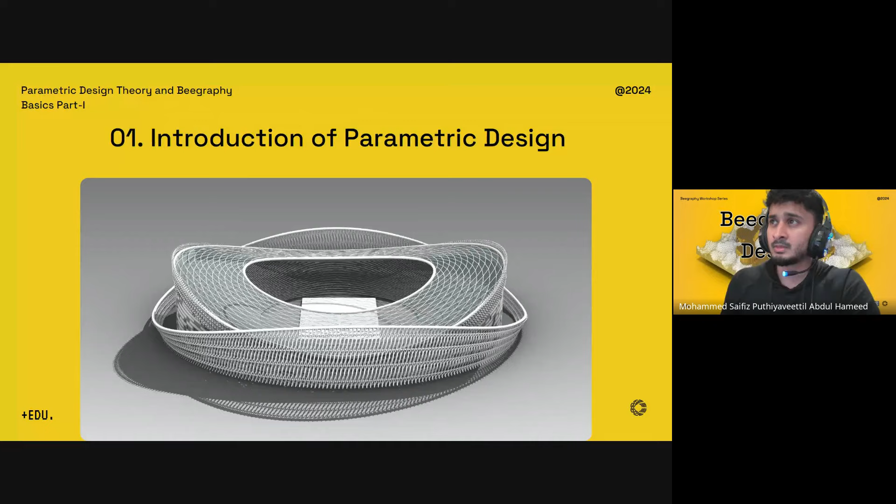So we can start with the introduction to parametric design. What is parametric design? It's not something very new. A lot of people have been developing concepts, theories, and tools on this topic. In easier terms, it's a process where you have parameters or algorithms that define shapes or forms, which then enables a flexible and adaptable design solution. So 3 key elements: parameters and algorithms that define shapes and forms, providing a process that is more flexible and adaptable as a solution.

Now, we'll compare with the traditional design process to better understand the advantages and disadvantages of parametric design. If you've worked on 3D modeling tools like SketchUp, Rhino, or any other modeling process, you'll understand that it's quite a static and linear process. It's more like sculpting. You make manual adjustments on a fixed geometry, and therefore the flexibility is quite limited.

But parametric design, as you learn more, is an iterative and dynamic process. You constantly play with the inputs and see what the output looks like. You again play with the inputs. So it's a back and forth. And once you understand some of the variables, you can convert them into constraints that you don't want to change.

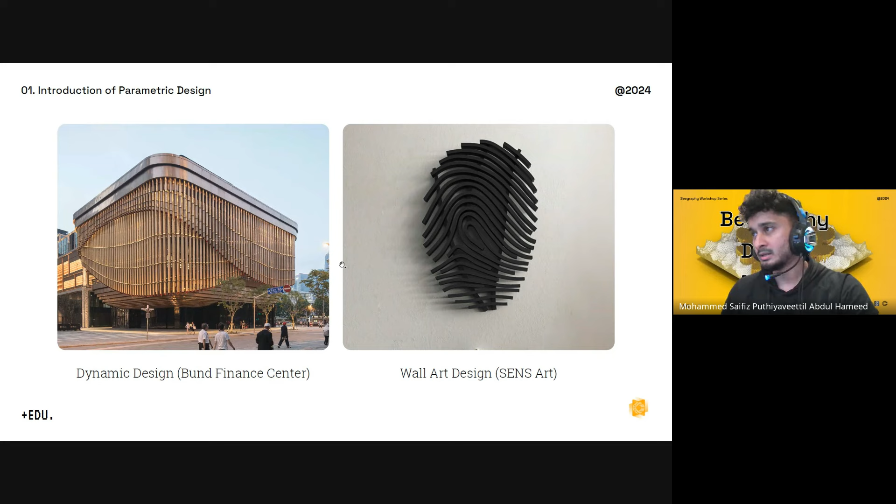We have also been trying as part of CODIN Parametric to develop some forms, some interesting forms, complex geometries that if you try to do it through a traditional method, you would find it tricky and challenging. And if you have to make 4 or 5 iterations of it, you can imagine how long that would take. We have been developing those forms with Beegraphy, and the results are very impressive.

So as you start trying, you could use this as benchmarks and try to make something way cooler than these. So this just gives an idea of how much you can push the limits, right? You can push even further.

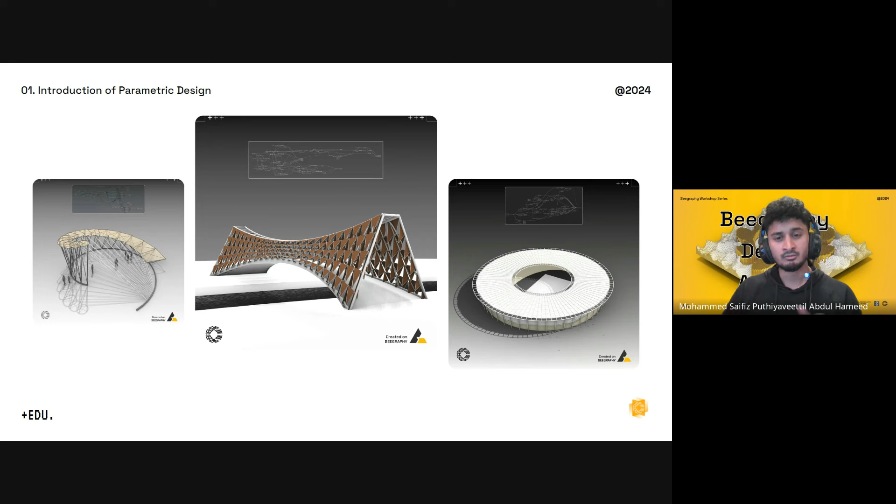Currently, the tools that are in the market that are available, I would say you have Grasshopper on the Rhino ecosystem, and then you have Dynamo for Revit, and we have Beegraphy. The difference is the other two are more local. You have to install it in your computers, but Beegraphy is more web-based, as Lernik had earlier mentioned. And you can see the shift in most of the tools and softwares, organizational tools. It's slowly heading towards cloud-based, most of the tools, because it's more about convenience.

You want to access it at your convenience wherever you are. It doesn't matter if you switch your computers, if you're on your work laptop, if you're on your home PC, wherever you are, you don't have to constantly carry files. So that brings a lot of convenience. Also devices, right? You want to work on different devices. So these have led to this shift, and therefore, me personally, I think Beegraphy could be the tool for the future when it comes to parametric designers.

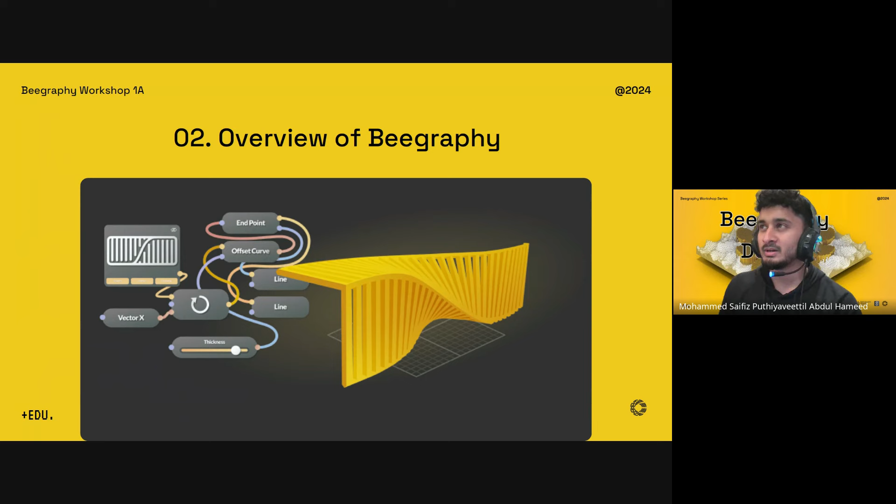So yeah, let's all hop on to this invitation from Beegraphy, and let's all join the journey and start working on it. So let's look into Beegraphy a bit more. So what is Beegraphy? Lernik mentioned earlier that it's a cloud-based platform, computational design tool for the cloud for 3D modeling. Another interesting thing is that it's developing as an ecosystem that is built to meet the evolving needs of modern computational design teams.

So as I go deeper into some of the functionalities of Beegraphy, you'll understand there are possibilities of collaborative tools, teams, the requirement of team as it develops. I think those functionalities have been integrated quite well, and these are things that make Beegraphy. I noted down some of the strengths among many, and these are: one, intuitive interface. I mentioned earlier that when it comes to parametric design tools, the steep learning curve has been due to their interface becoming less intuitive and becoming more challenging for them.

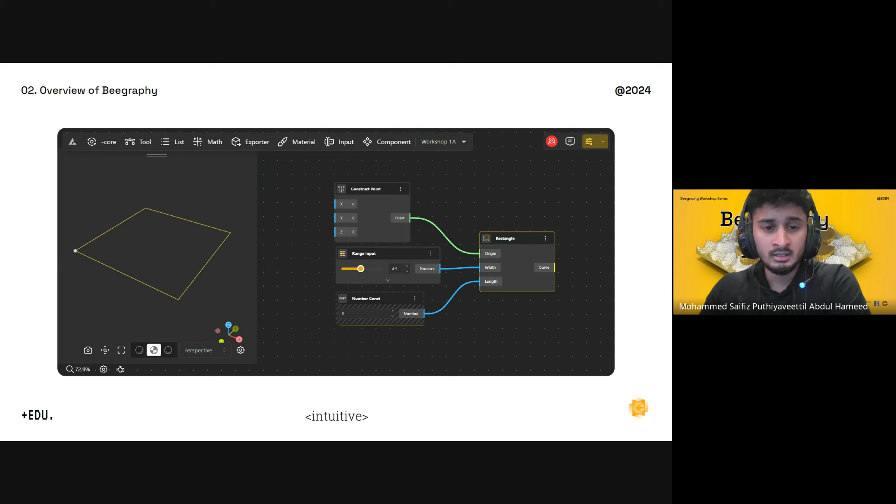So I think Beegraphy has managed to make it much more intuitive, collaborative, and compatible. So these three words are key strengths that everyone has to keep in mind among the others. But when it comes to intuitive, you have all these functionalities within one common interface. You have the 3D viewer embedded. You have icons, tools, all accessible.

When it comes to collaborative work, all these people working in the same file - people who are currently working can clearly understand how you have to share the file with different people and get comments from each, and coordinate a lot. While on Beegraphy, everyone can access the files based on different access levels, and each of them can give comments. You can also provide just the viewer mode to the client so they can check the output and the progress of the model. So it's collaboratively super strong. I don't think there's any other tool in computers today who would be doing this anytime soon.

Compatibility is also very exciting. You can use this on your phone, PC, laptop, and all devices. And I'll want to push Lernik to see if we can do a VR version in the future, where you're developing on parametric tools in VR. That'll be pretty cool, we will do that. I think early next year we'll have AR VR.

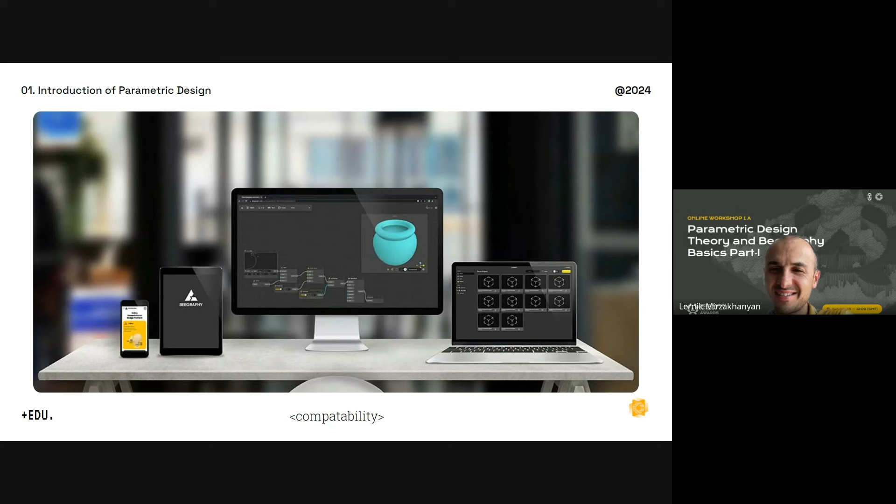That'll be crazy cool. So those are three things, but it does come with a few pressure points. But the whole Beegraphy team is there to support us. So currently it's all being done on the cloud, so with very heavy models you might start to find some challenges, but we can figure out ways to make it or keep the model lighter.

Adding plugins - we've just started slowly building that. I think that's something we'll be introducing soon, the new plugins manager, Beegraphy Plugin Manager, as we called it, BGPM. We are working on it. It will be available, I think, hopefully next month, or at least the first version. Something is already available now, but it's very limited in functionality. We will constantly work on it. I think in a few months it will already be featuring plugins for everyone.

The bugs part is something inevitable. Every time we add a feature, it may come with a bug, but we are trying to squash them very early. And I rely on the community to report everyone - each one of you, let us know. We are available on Discord, you can find me on LinkedIn, you can email us directly or anyone from the team, and let us know that something is wrong. We will be really happy to address the issue.

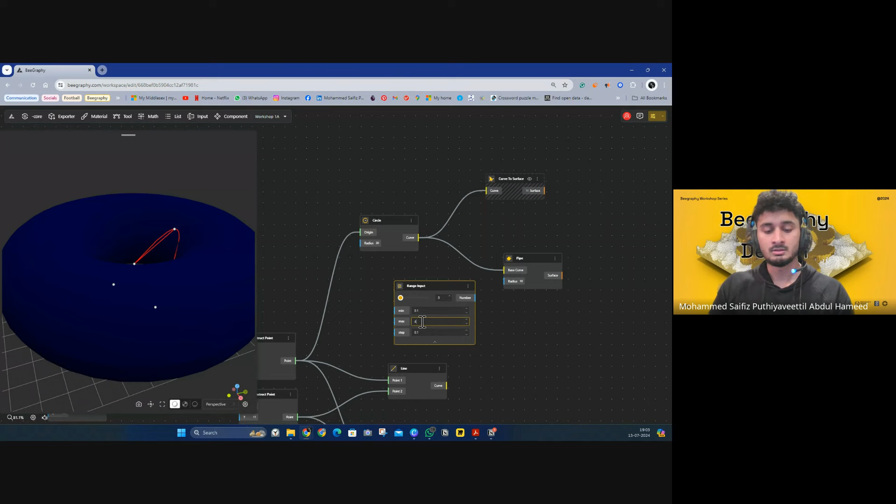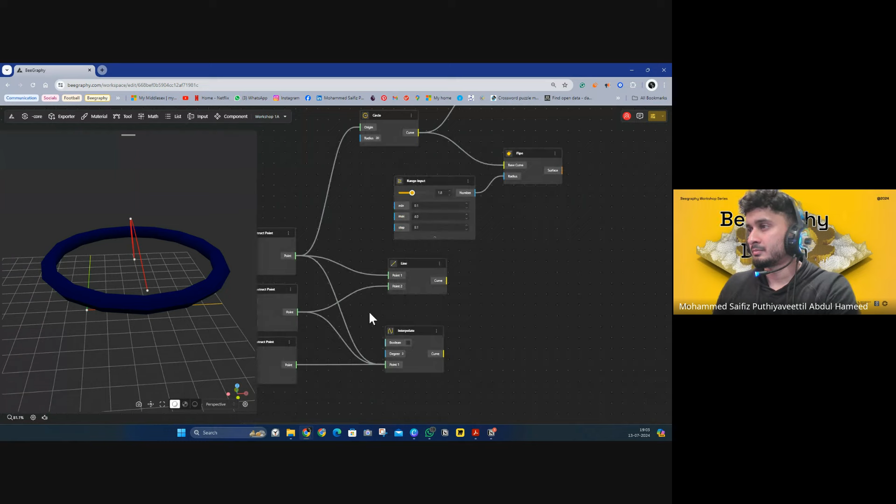Look at more functions: you could create rectangular surfaces as well. We did that initially. What you need to give is an origin point, and then you have your width and length, and that creates a surface.

I addressed it then, yes. That's how you create surfaces easily out of some curves.

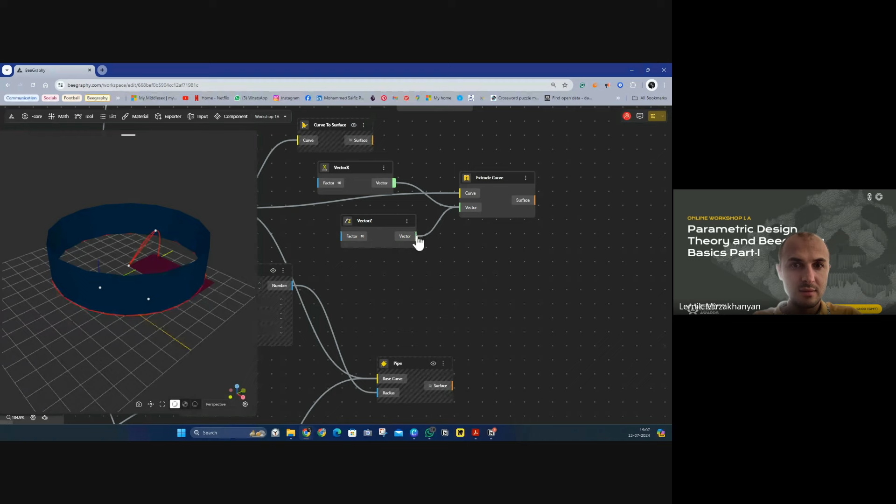Is the extrusion too small? No, maybe it's vector - in Vector X it doesn't know how to extrude it. Or something's wrong. I think it's just X and Y. Let's try reset. Obviously yes, again a bug.

Another interesting function that isn't in Grasshopper, I've noticed, is you can click on the geometry and it takes you to the component, which is quite cool. So you don't get lost in the script.

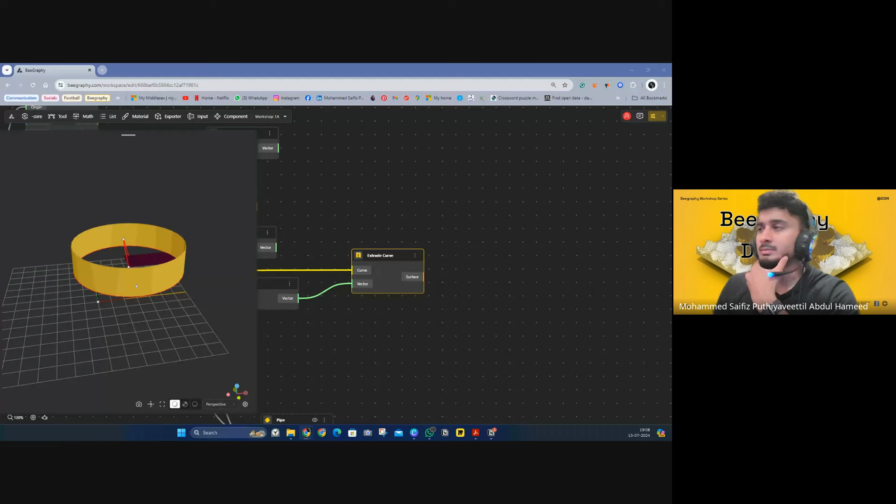So that's about extruding curves and simple surfaces. We've done simple surfaces, we could also look at solids. There are solid options where you could bring spheres, boxes inside these. About the sphere - as you can see, there's quite a lot of options for creating geometry.

We'll go into more transformations later on, as we discussed earlier. So we looked at some of these simple geometries. Now we'll try moving, scaling, mirroring - these kind of functions. So this would require a bit more complexity involved.

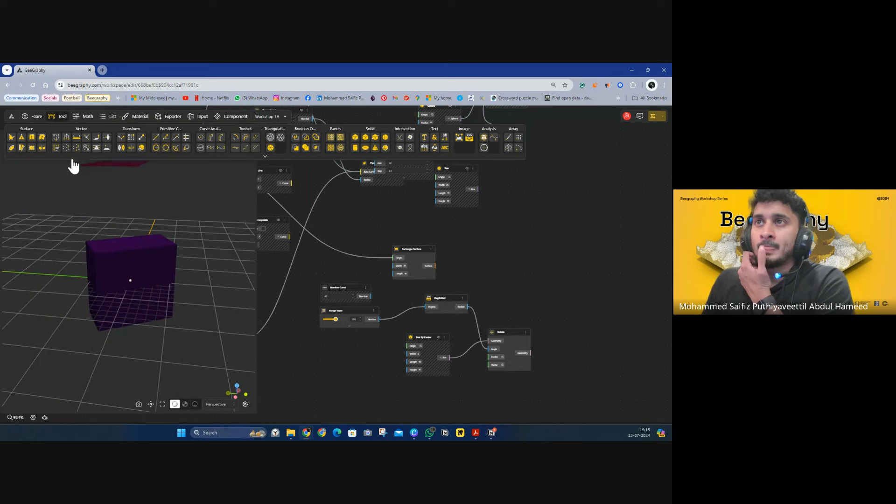360, see. Cool, so that's rotation, you have move. The other transformation tools like mirror, scaling - scaling is also quite important. We can try scaling the same box object. Yep, so that's also sorted. So scaling - these are some of the quick transformation things that you all can try out.

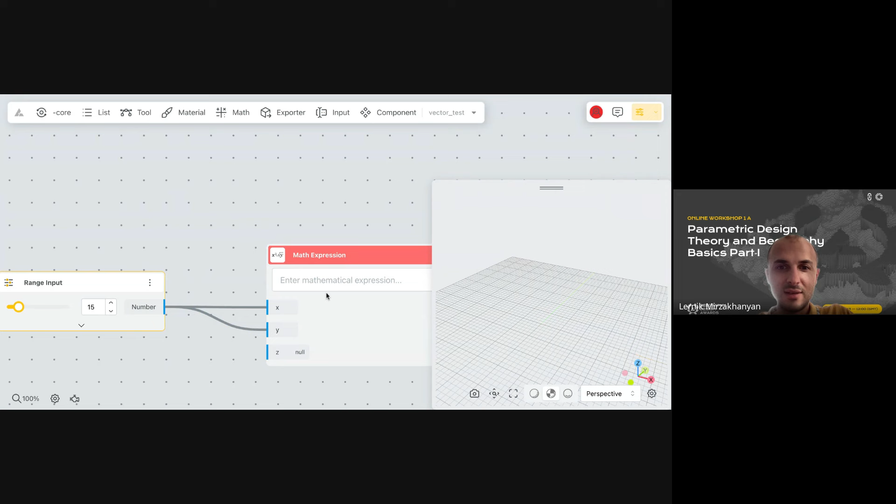Yeah. And the right versions. How do you square root? Square root. Yes, you can do the equations, but then how you apply those values is a different question. It depends on your approach.

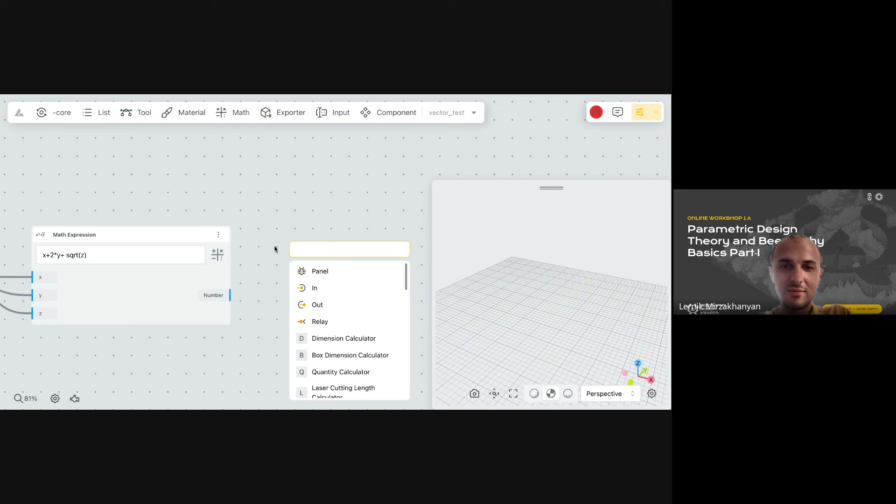So create points and use those values for those points, for example. And then construct lines, curves, and loft the curves. That's how you can probably do that in Beegraphy, rather than creating a surface and just using a math expression as an input.

Yes, in Grasshopper we can do that. What's the name of the node? It's not a node, but a mathematical expression which we have to input. So we can also do that in Beegraphy, but we will have to use multiple operators to do that. Maybe after the call you could educate me a bit, share some links. I can explain it after the call.

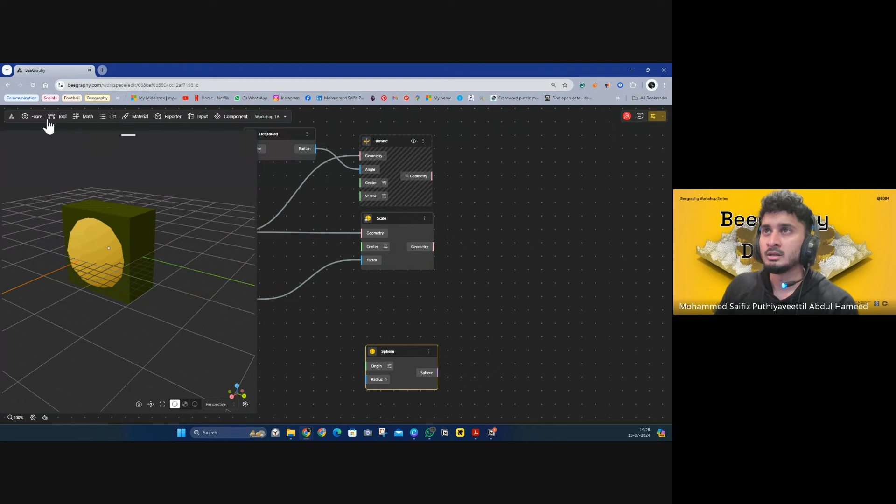Now we have the Boolean tools all under here. So you have Boolean operations. You have Boolean surface union. You have solid union. So let's bring that. Again, hold shift to bring the other. Right. And if you hide both of them, now it's working. So that's one solid union.

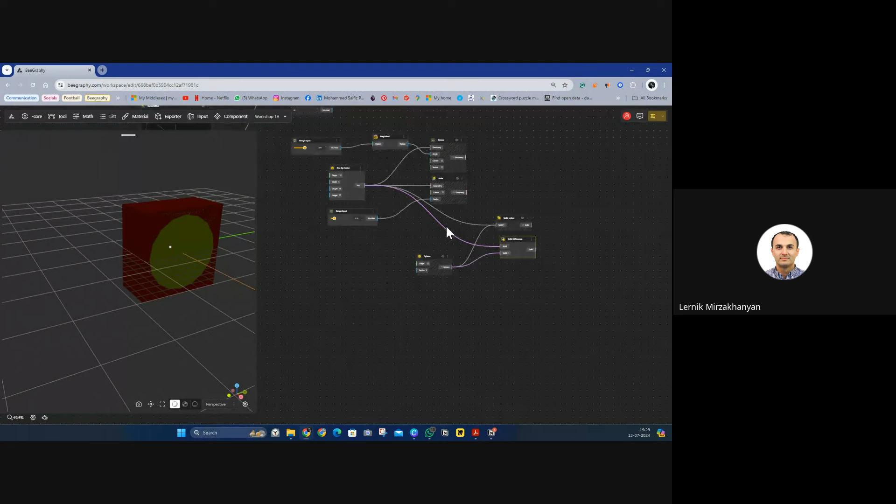And if you want to find the difference of it, you can do a Boolean difference. Same process. So you provide the initial solid that you want to keep, and then you take the other one that you want to cut from. Hide the others. You have something visible. Can you click on that sphere in the middle? Yep. Yeah. So now we have a Boolean difference. So you have these subtract functions as well that you can incorporate into your form exploration.

Next thing would be paneling. Paneling is interesting. So let's hide what we've done so far. I have all the panels here. Pick up a simple one. Surface, add the surface, divide. Same thing, add a range input to it, and you can start creating different types of panels. And then you can access the panels here and also the centers here separately. So that's mostly about how you can create these panels.

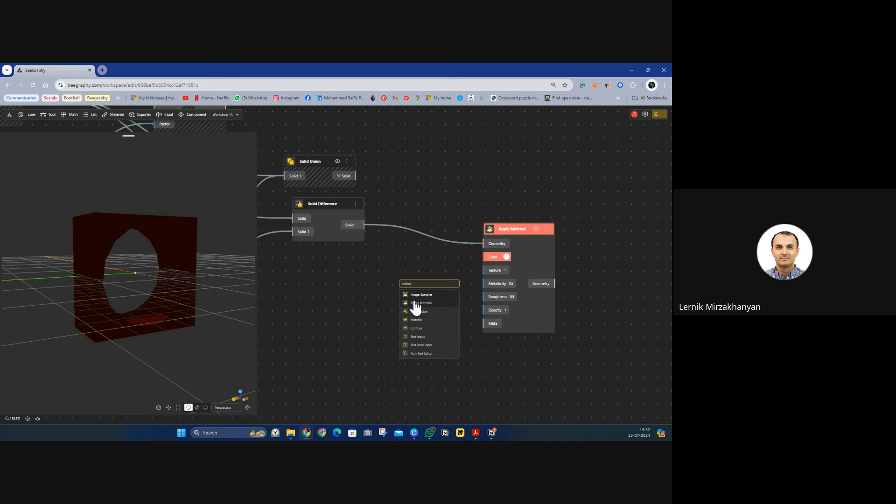Another thing that I will show quickly is adding material to this. So you have the materials tab in a texture. So this is applying material. I think it would be better to apply it on that geometry that we created earlier. Geometries. It wants a color because of the color input. It shows an error. Yeah, you can pick it from any part of the screen and then add it to the color. You can provide material. You can also adjust metallicity and roughness. I'm going to add a quick slider on this.

And to see the material more clearly, just change the render style. Yeah, and once you're kind of happy with your model or geometry, what you can add is an exporter in whichever format you prefer. Bring your exporter, connect it to the geometry. And then when you go here, you have an option to export. So if you have multiple exporters, you'll get those options here.

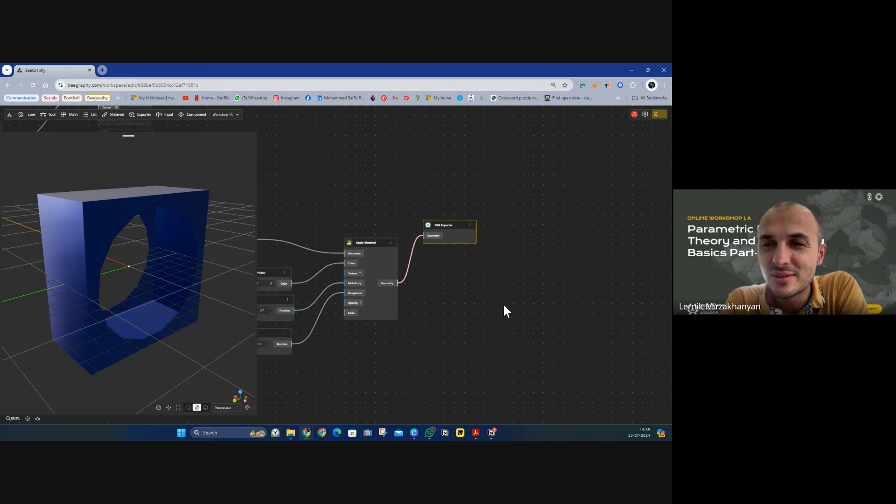Saifiz, I just thought that maybe quickly go over the configurator mode and the demo mode. Oh, yes. So if we go into the configurator mode, we can view the model with all the variables that we had added earlier. So currently what we made active are the metallicity and the color options. We'll cover this in the next module as well, and then we can come back to it and show it in more detail. So in this module, we'll just keep it a bit rough. Okay. And then we'll add this.

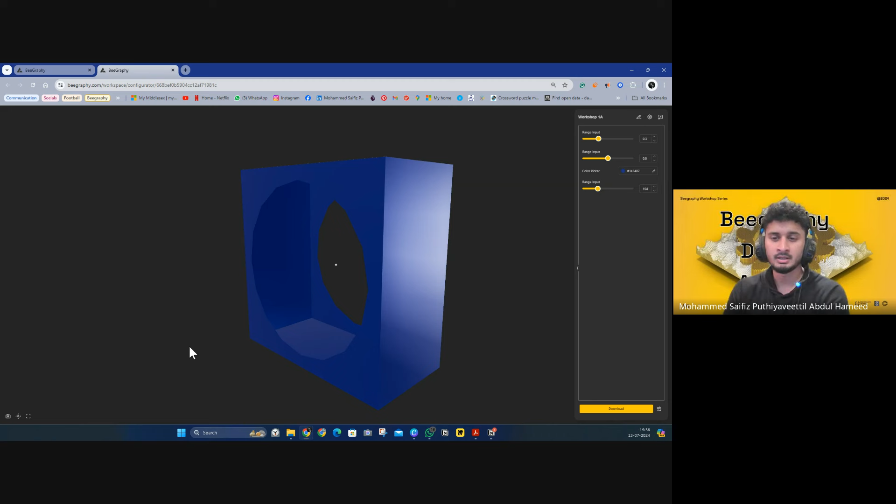Yeah. So if people have any questions about just the basics of these steps, I'm sure it's there in other tools as well. But for people who are new, getting an introduction to this is quite important. Yeah, if you guys have any questions, please drop them in the chat. We'll take another 10 minute break, and then I think we could start with the first module related to the categories.

Size of the panel in the paneling tool. Oh, let me try. I don't think it's possible similar to Grasshopper, but currently it's more on the U and V values based on the subdivision. No, I think he's talking about the debug panel, like resizing the debug panel. Let me.

No, I just tried. It's not possible.

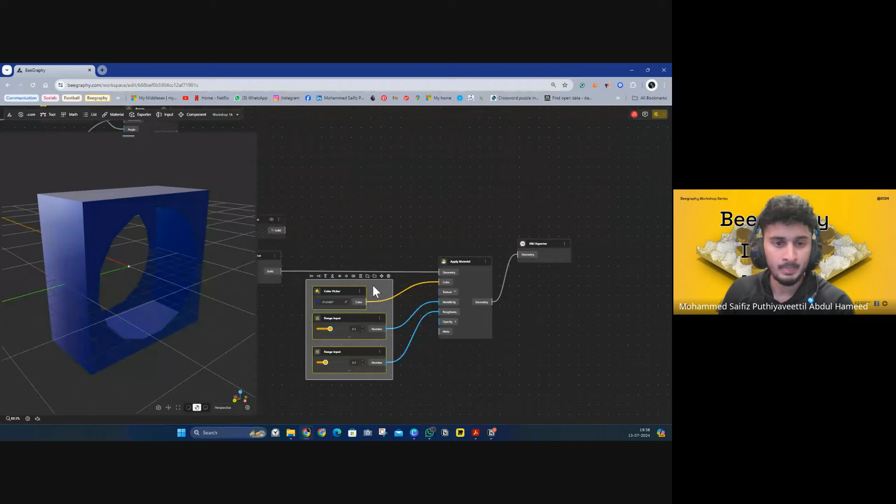Adding nodes to groups. Yeah, you can create groups and then add nodes to groups in a similar manner, like in Grasshopper. Okay, Saifiz is now gonna show that. So he selected a group, and then there's a folder type icon on top. You can create a group. You can remove, ungroup it. You can also align a group of things. These things will definitely tidy up your script.

And you also can click Control G, or Command G for those who use Mac, to create a group, and then you can also rename the nodes, the inputs, and the groups by double clicking on the name. And when something is grouped, it will be also displayed as grouped in the demo mode and configurator mode.

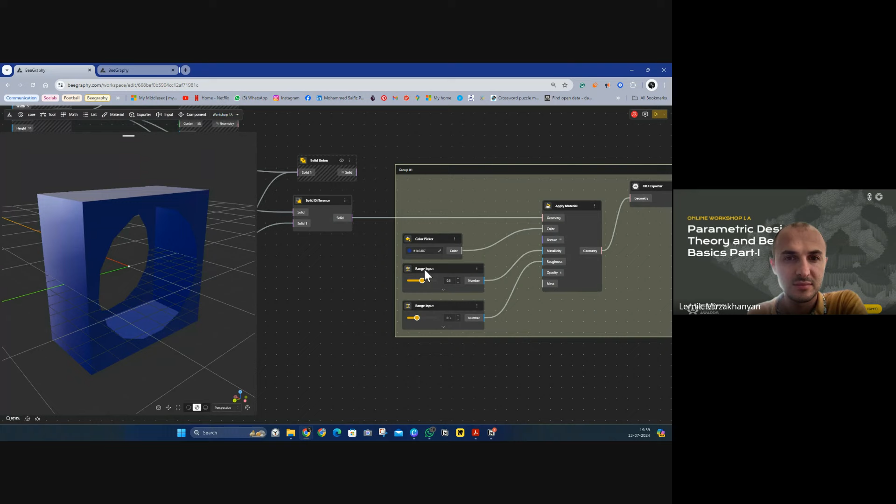So you can click on the group 01 and it will expand. And you can rename those inputs so that it's clear for everyone, like those range inputs. Yeah, these ones, no? Okay. Currently, we haven't given, so we could.

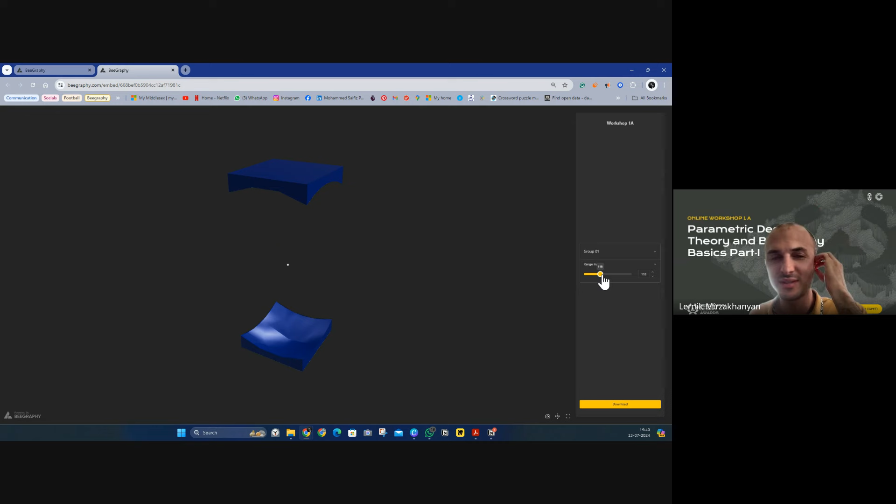Scott, I don't know how to answer the question. Like, is your question why we decided to do it in the web, or in general? If the question is about graphical programming interface, it's not us who invented it. The most popular tool for that is Grasshopper, the industry standard, which is a really great tool, very powerful. So our approach was to do the same, but in the web, so that more people have access to it, so that it's easy to integrate, so that people can collaborate in real time and stop sending each other files

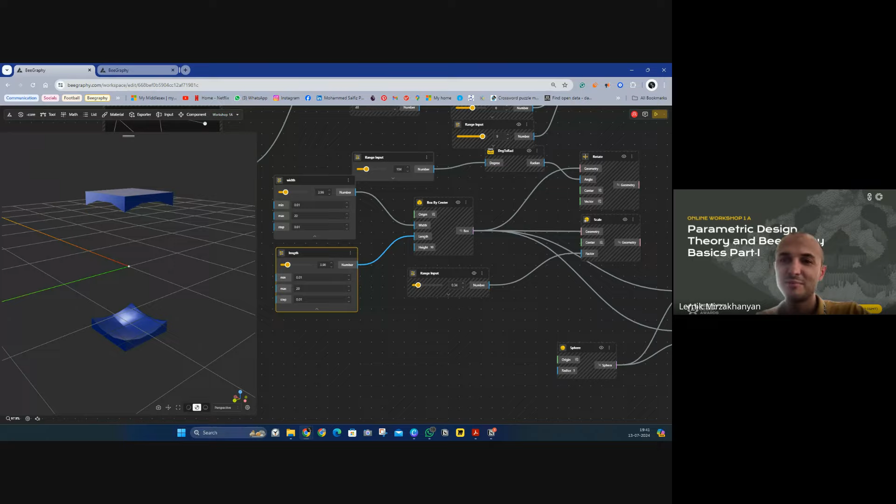or even sharing static files instead of letting their collaborators participate in the design process. For example, as Saifiz is now doing in the configurator or demo mode, a person who doesn't know visual programming or computer aided design can participate in the process and adjust the model just with the intuitive interface, like with sliders or drop downs. I see. Well, hopefully we can make a good tool that you can use with your clients.

Questions, I think we've covered most of the questions. Did I miss anything? Oh, yeah, there was a question. Any plans to add loop function where next input is based on the last output? Yes, definitely we will. It's on our task board. It's just we didn't get time to develop it further. So thanks for another reminder that it's something that you want.

Oh, just noticed that you were talking about the panel size on a surface. Yeah, Saifiz answered. All right. But let's head to the third part of the module then. Yeah, go ahead. Should I start? Yep. Let's go.

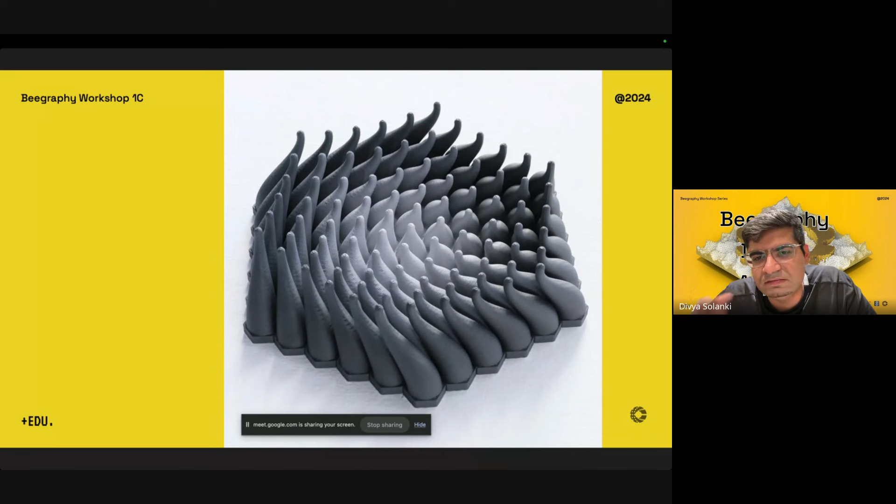So what we today will try to achieve is a form like this, and we will just try to understand how to build a logic for such a form, and then this particular logic can then be applied to any one of these forms as well as this.

So I think we can go forward to the Beegraphy page. Is my Beegraphy page visible for everyone? Yes, yes. So if everyone wants to start along, we can start at this page. I hope everyone has logged in and has this page, the editor page, on their systems.

So the first thing we can do is create a new model, and you can type in the model, and the model will come in this space here. We can also left click on this, and we can see there are multiple options, but for collaborating with other editors, we can share this, and then we can tweak some settings here to give access to multiple people, as editor or viewer or configurator, and then we can just copy link and share it with people we want to collaborate with.

So for the current workshop, I've already created a model. It's called Art and Collectibles, and we'll try to make the geometry in it. So maybe everyone can follow suit, and we are in this space now. So I'll just try to take us through the logic of the parametric building. Can everyone see the whiteboard space?

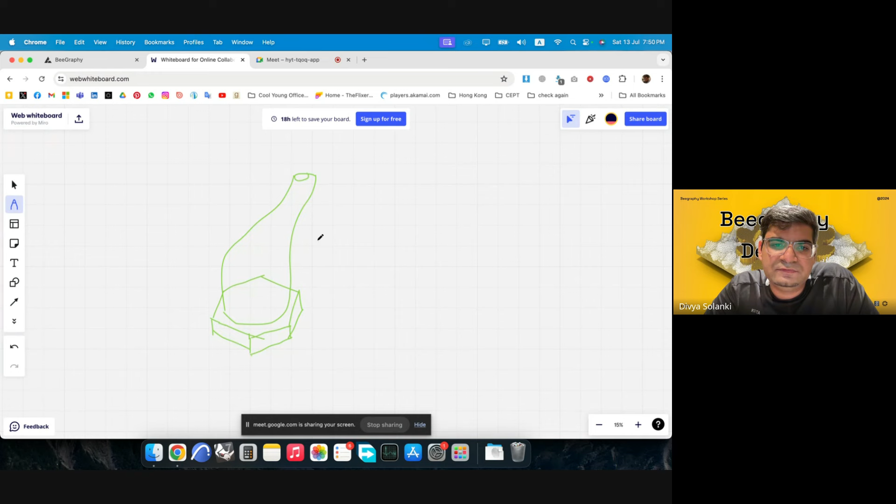And then you have a geometry which is a slightly eccentric geometry. So it rotates around, and it takes an interesting shape. And we would try to generate the shape in Beegraphy. So if we want to start, we would require a hexagonal grid first. Then we would require... okay, we'll come to that part in a bit. So let's start with the hexagonal grid first.

So if I go into the Beegraphy space, I can just write hexagon, and you'll have two options. The first is hexagonal grid. The second one is hexagonal panel. The one we'll go with is the hexagonal grid. So when I put the component here, you can see it has already zoomed in the modeling space, and we already have a grid in place. You can see there are some inputs and there are two outputs. The input it is asking is the origin, the radius of the hexagons, X and Y, and padding. Padding is basically spacing between the hexagons.

So origin by default is 0, 0, and we can see it has started the grid from the 0, 0 point on the modeling space, and our x direction is the red one here and y is that one. So it has gone in the x and y direction. The first thing we can do is give it a radius. So radius is basically the size of each of the hexagons.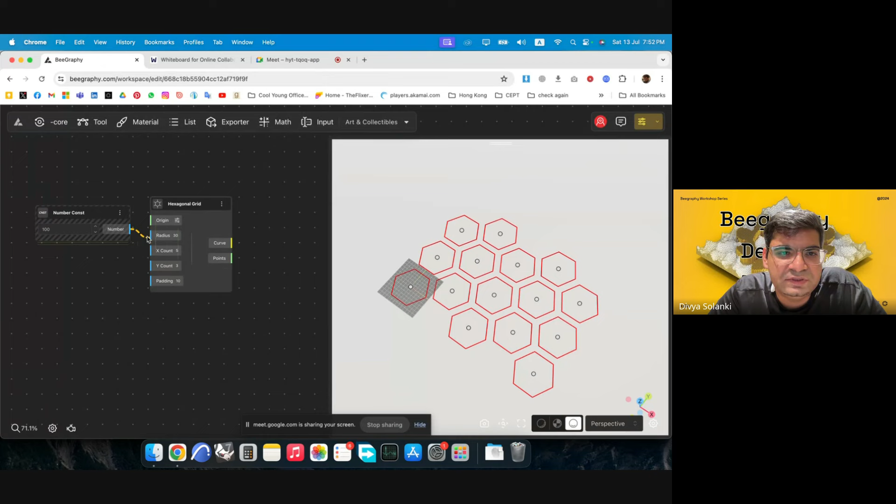So if I have to make this a constructible model, like a buildable model, then I think I'll go with a radius of 100, which would make these individual hexagons a 200 millimeter wide base. So I'll put that in radius. So you can see the grid has scaled up. Then the next thing we'll do is increase the x and y count. So I think I'll increase this to 15. I'll try to keep this constant for both for the ease of the process. And we can see we have an array of points already.

The next thing we can do is increase or decrease the spacing in between. I think it's 5. Sorry, it's 10. We can go with a 5. Yeah.

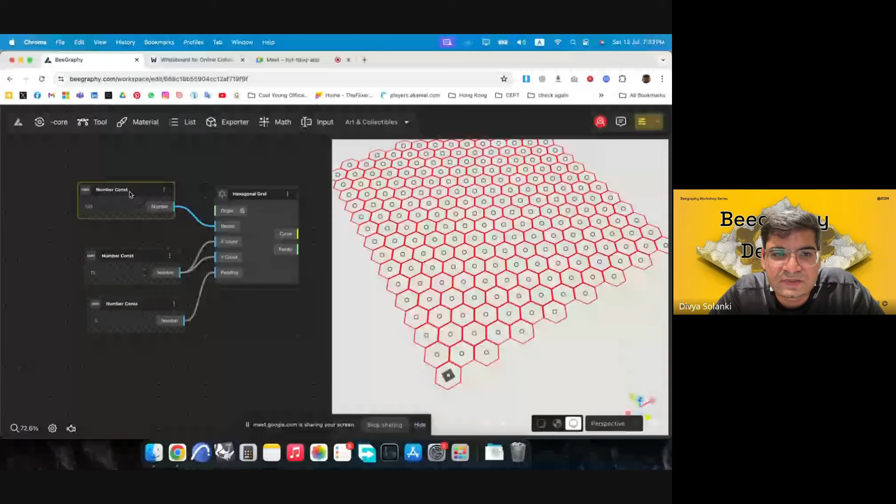Okay. Here I'll redo the constants because I want these to be variables. These are currently constants, and I want this to be available in the configurator mode. So I'll just type in 100 again, and I'll go for the range input. And I'll change its name here to hexagon size. Same thing I'll do for the other one, 15, range input.

And I'll change its name by double clicking on it to the hexagon grid size. And then I'll drag and copy it. And I'll change the last one, which was 5 here. I'll change this to 5 as well. And I'll change the name to the grid spacing. So we have 3 ranges now.

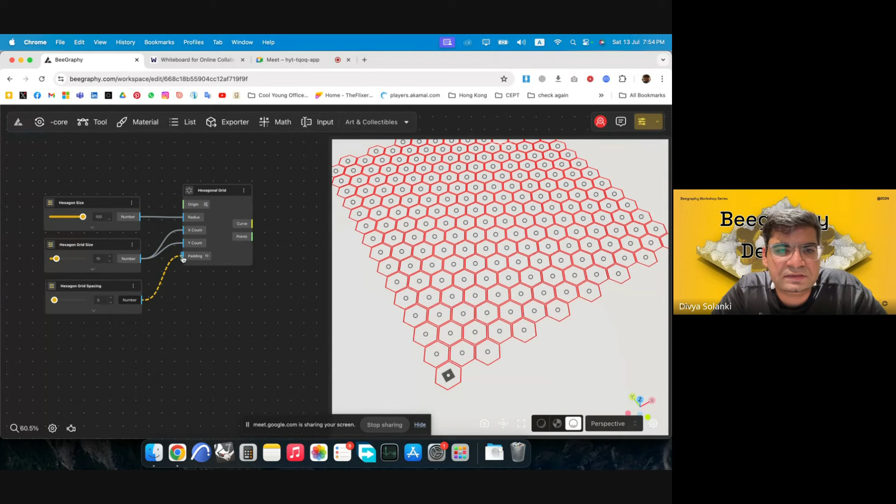And I'll replace these with the range. So this goes here, this goes in X and Y, and this goes in our spacing. Yeah. So now we have a grid. Now if I go back to that particular design, we can see it has a hexagonal shape to it, and it's not a squarish shape. But what we can try is maybe making a circular shape for the whole assembly together.

So for that, what I'll try to do is make a circle first. So I'll double click on the space, I'll write circle. And it is asking for an origin point and a radius. I can just stay with the basic, and the radius, I can make it 1 meter wide in totality. So I can go with 500, which is 500 millimeters, and I'll give that as the radius. So you can see the circle has come there.

It's a bit small. Maybe we can reduce down on the radius of the hexagons. We can make it 50. Yeah, that looks a better size. So each of the hexagons now are like 10 centimeters wide. So we have the circle. Now what we would want to do is move the circle to somewhere in between the grid. So for that, I would just move the circle. So I'll write move. I'll put the circle in geometry.

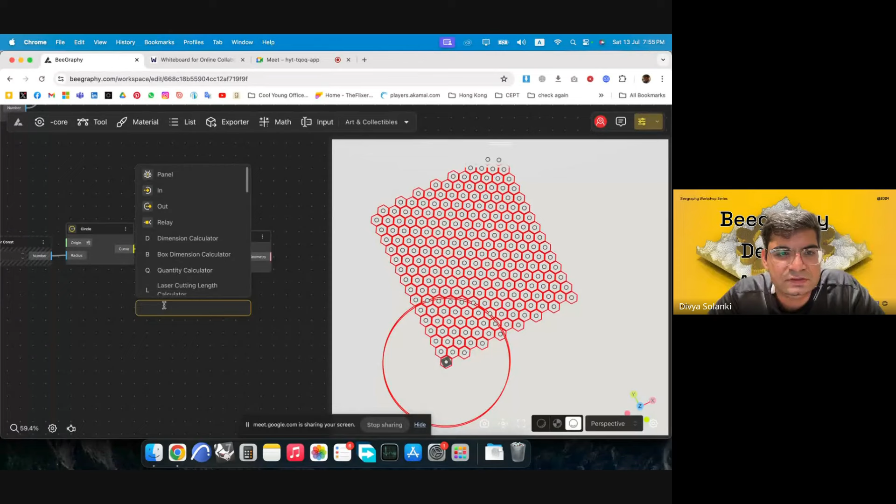I have to move the circle first in the X direction and then the Y direction. So I'll just move in first the X direction. So vector X. And then I can give the vector X some amplitude, which is the factor here. Our circle size was around 500, so we can give it, sorry, a 525, so that it's slightly beyond. So you can see the circle has been moved, but the previous circle is also visible. So we can just turn off the preview of that particular circle.

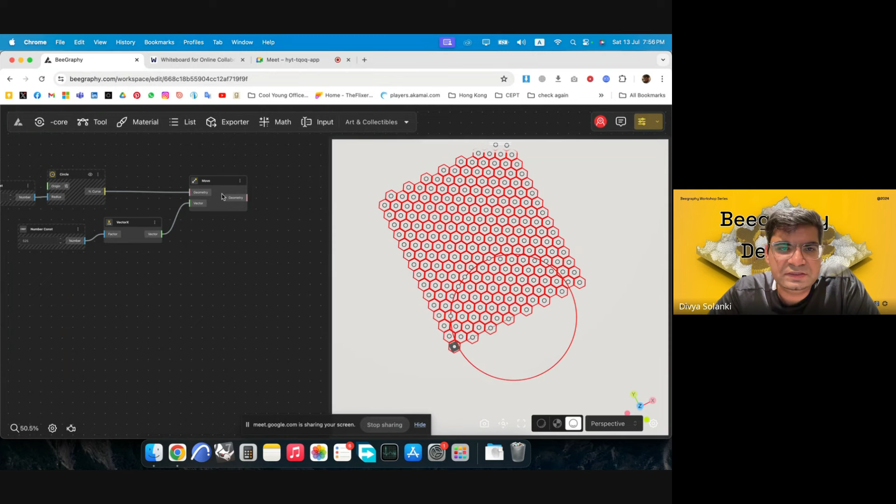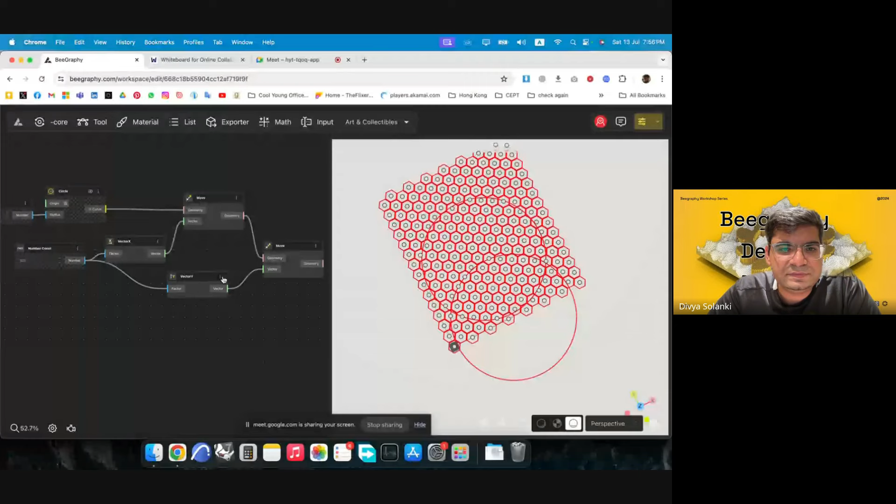Now the circle is here, but we would want it to be in the middle of the grid. So we can just move our already moved circle in the Y direction. So I'll just write Y here and then input the same amplitude that I gave there. So now I'll turn off the preview of this whole thing, and we can see the circle is somewhere in the middle of the grid. And now we have some hexagons which are outside the circle and some which are inside. So the next logical step would be that we analyze which of these hexagons are inside the circle and which are outside.

So for doing something like that, I'll just increase this a bit more. I think I'll go for 550, so we'll push the circle a bit more inside. And then I'll do a simple analysis. All our analysis parameters are also present in this particular tool set. So if you go into tools, you can see there is a section dedicated to curve analysis. And in this, there is a tool called point in curve.

What point in curve does is it tells us whether a point is inside a particular curve or outside. It just gives us a Boolean answer, whether it is true or false. Actually, it gives us three outputs. It gives 0 if it is outside, 1 if it is on the curve, and 2 if it is inside the curve. So there are 3 particular outputs. So for testing each of these hexagons, we have the circle with us. Circle would be our curve for testing out the points.

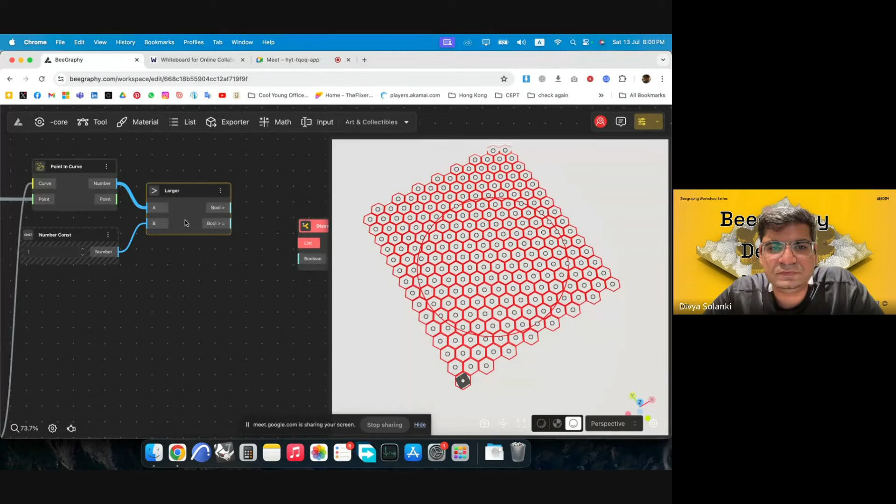So what we'll first do is, this says that if the output is 2, then it is inside. So we want to just check for all these numbers if they are larger than or lesser than 2. So I'll just write a constant here, I'll just write 1, and I'll plug this in. So if you click on the output, you can see it is giving us a true and false answer, whether it is inside or it is outside.

So in the dispatch, it uses that particular output of true and false to tell us if that hexagon is falling in the circle or not. So I'll put this in, and the list we want to segregate is the hexagons output. So I'll plug this in here. So as you can see, it is giving us 2 lists now, one which is inside and one which is outside. If I just want to see one of the lists, I can click on the other one and just preview one of the lists.

I can also preview the rest of the model. So as you can see, we have segregated the hexagons which were falling out of the circle. So this provides us a nice base for us to start modeling the rest of the geometry.

Any questions till now? Should I speed down or? Okay. Person says a little bit, maybe. Yeah, I'll just speed down a bit.

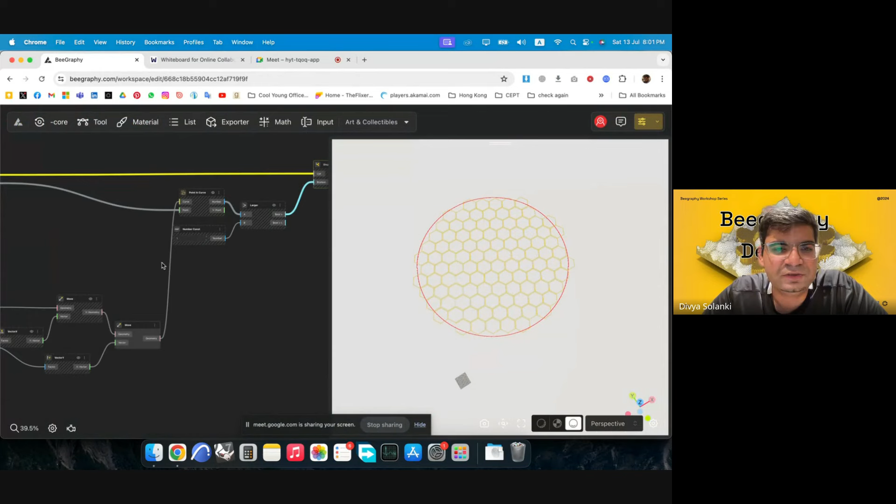Okay, so I'll just recap a bit. First, we made a hexagonal grid. Then we made a circle, which we utilized to only get a circular base, a circular assembly base, and then we used that circular base to segregate the hexagons we want to use to make that geometry. So this is the last part of the process. So now we have all the hexagons we want to use for making the geometry.

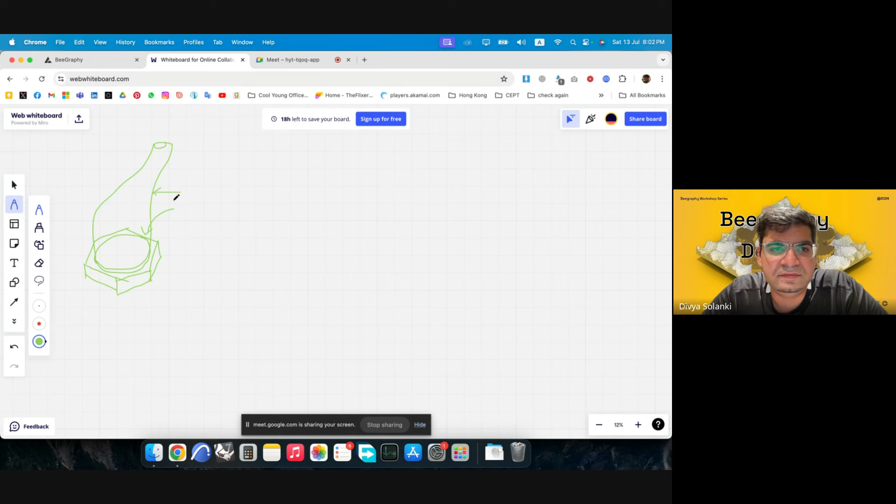The first thing, I'll go back to the whiteboard again. So for making such a geometry on the top, which is a curving surface and changes its cross section across, we can use something called loft. So what loft does is you provide it curves. Say I provided it this particular curve, and then I'll provide it another curve which is slightly larger, and I'll provide it a smaller curve, and these are basically cross sections of that surface.

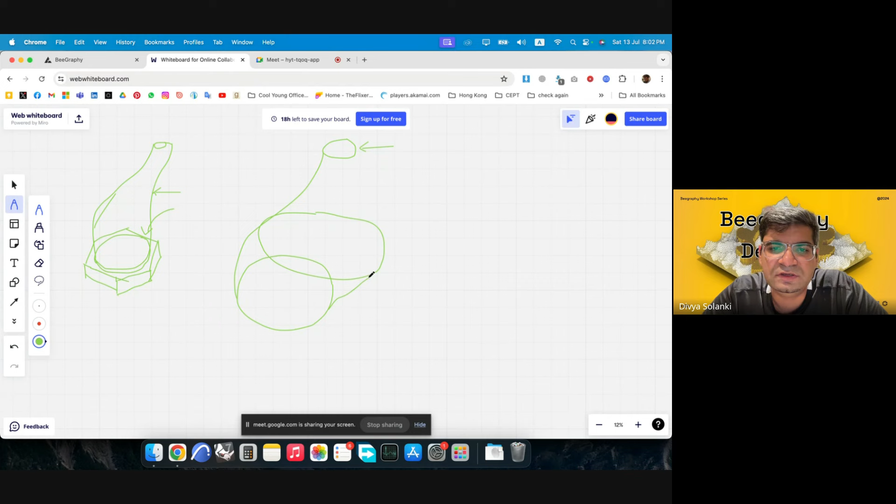And then I ask it to loft them. So what it will do is it will blend a surface between these particular sections, and then it will give us a surface through that process. So we'll use something like that. So if you want to create a geometry of this sort, we'll have a cross section for the base, a cross section for the middle part, and then a cross section for the top, and then we will just loft these together.

So for making a cross section, we can just go with a basic circle. So we would have to generate a circle at each of the midpoints of the hexagonal panel. So I can make the base first, then the middle circle, then the top circle, and then I would have to move them up to their respective heights, and then loft a surface through them. So that is what I will try to attempt now.

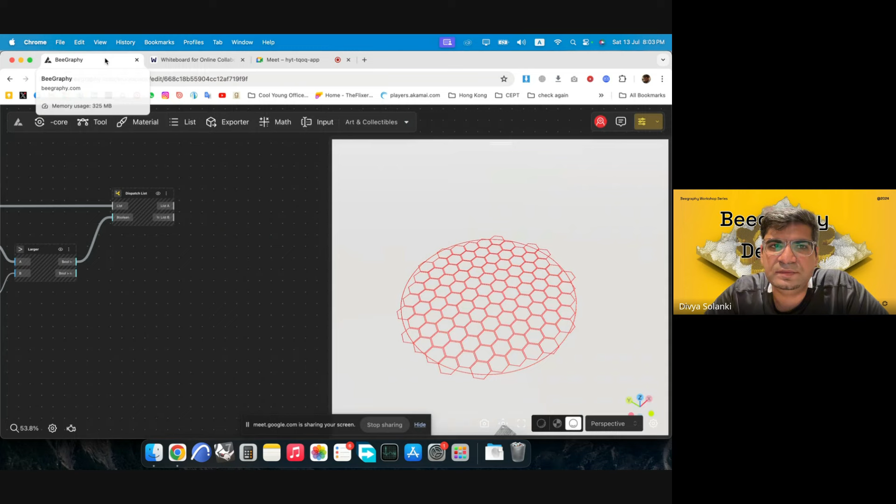So I have the dispatch list. I want to create a circle there. For creating a circle, I would first need a point for the circle to start from. So for that, we can use centroid. I will put the list we have isolated, and you can see it is only providing centroids for that particular isolated list. Now these centroids we can use for creating circles.

So I'll write circle, and I'll put the centroid into the circle. And as we can see, we have really small circles. Maybe we can increase them in size, but they don't have to be larger than the hexagon itself. So I'll go for something in the range of 40.

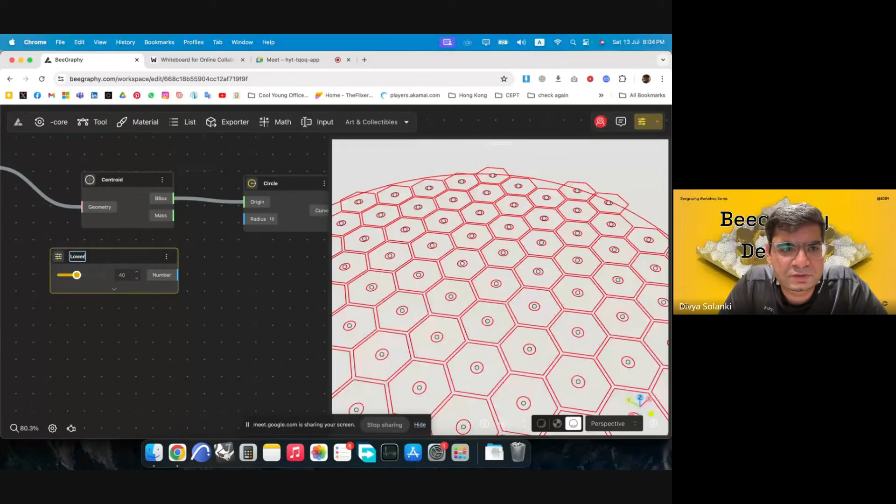So this, I'll just change the name to lower circle radius, and I'll plug this into radius. So as we can see, we have a circle for each of the hexagons.

Now we want to develop circles for the middle cross section and the top cross section as well. I'll use the same centroid, push this back, and space it out a bit more. I'll select these two options, drag them down, and press Alt so they copy. Now I have two sets, and I can reduce the radius by certain amounts. I'll go with 27.

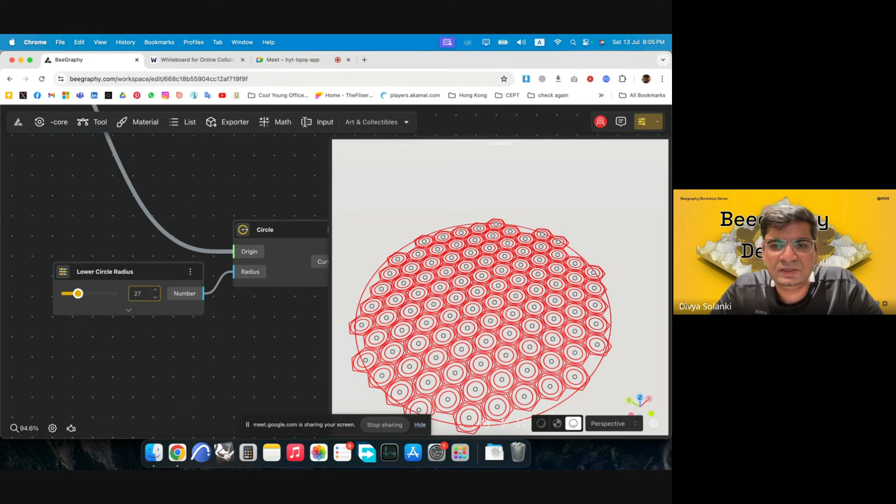You can see there are two circles now which are concentric on the same center point. I'll do the same thing again: drag it down, press Alt to copy it, then reduce this down further to 7. So now we have 3 circles which are concentric.

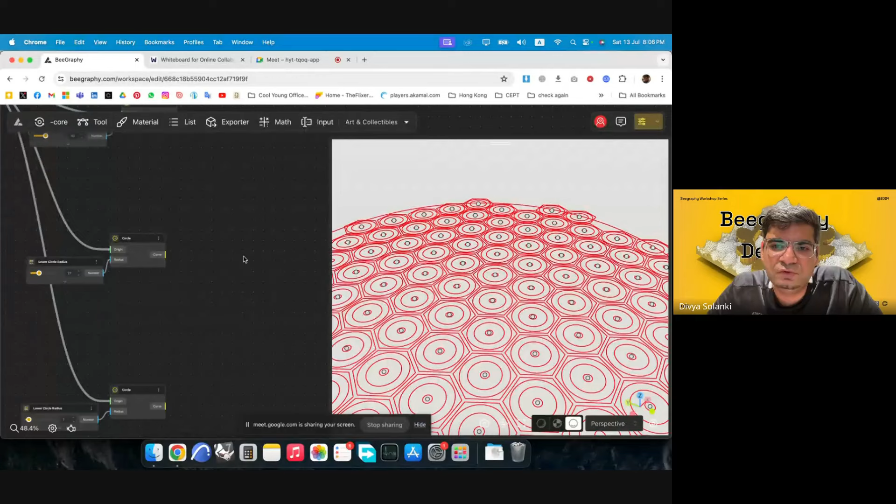Now, to make a surface out of this, we want these cross sections raised to that height. We'll start by moving the middle one first. For moving a curve or any geometry, we use the move component. I'll plug the curve into the geometry, and you can see it has already moved the circles to a certain height, which is default.

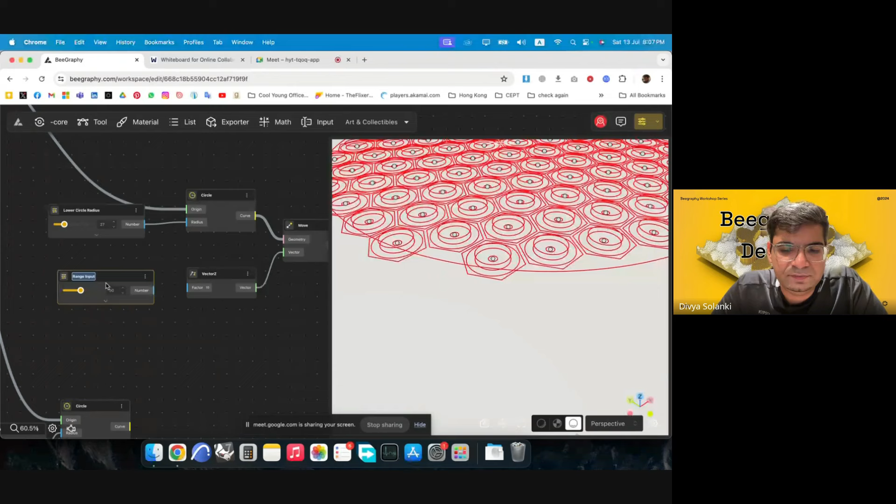It's 10 in this case, but we can give it a particular direction. So I'll give it a direction in the z vector. I'll first write z, plug the z vector into the move, then give it say 50. Again, this needs to be a range, so I'll write 50, go for the range input, and change the range input to middle circle height.

Oh, I have not changed this to middle circle. So, middle circle radius, and this would be upper circle radius. Now I'll connect this here, and it has risen up to a height that we require, 50 in this case. We can always constrain that height. It is maximum 100 here. I can go for maximum 60, minimum 10.

So this has risen. We'll do the same thing again for the upper circle as well. I'll write the move component, put in the geometry, which is the circle, give it a z vector, and give it a height. In this case, I can make it 100. Again, range input, and I'll change the name to upper circle height.

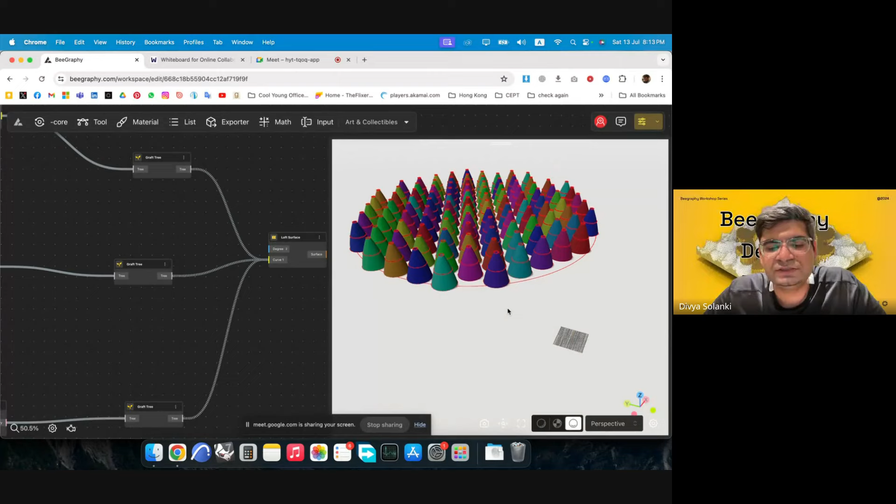So I'll copy this thrice and plug the geometry in. You can see if I put this together, I can press shift and drag another wire to the lofting component, and it has started developing surfaces based on the cross sections we gave. But this looks quite simple, quite boring. It doesn't have any character.

If we want to achieve something like this, we would have to give it a twisting motion. So for doing that, if I go back to my sketch, you can see the cross sections are not just moved in the z direction, they are also moved in the x and y direction. So these cross sections are first moved up and then moved sideways, or they are rotated. So we can also rotate them based on a center point.

Great. So, any questions so far? I hope everyone is able to catch up.

Okay, so we have the loft surfaces now. The next thing we want to do is give that twist, and we'll only do it for the middle section. So what we will do is take all of these middle sections and rotate the whole set together from the center point of the circle, and we would have to do this before we make the loft.

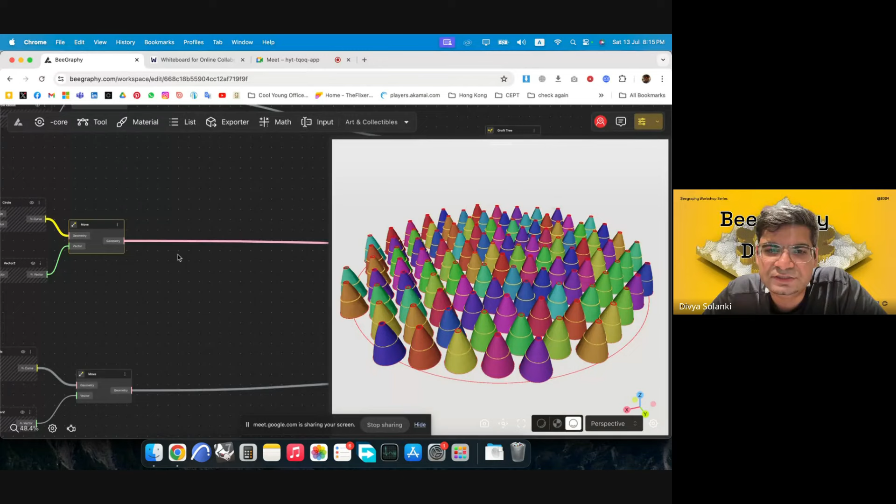So I'll just move this forward. We have these middle sections, and we'll use a component called rotate, and plug this geometry in. Now as soon as we plug this in, we can see it has rotated all the set together, but it has rotated it around the grid center, which is somewhere here.

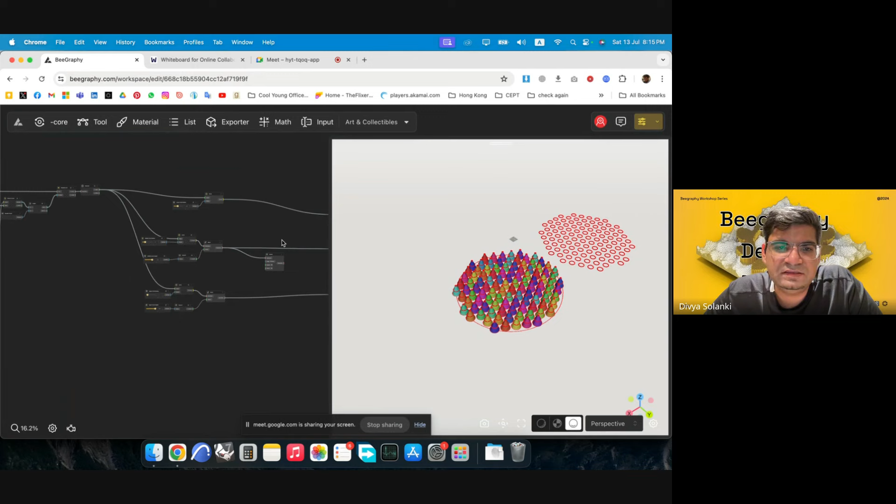But we want this to be rotated from the center point of the circle. So I can go back to where I made the circle itself, and use centroid to get the center point of the circle, which is here. Now I can move this component a bit ahead and use that as my center point for rotation.

The second thing it is asking is angle. If I click on angle, I can see it is saying rotation angle is in radians, so I would want it to be in degrees. So I can use the component called degree to radian, deg to rad, and then I can put this in the angle and give it say 5 degrees.

Again, I want this to be a range, so I'll write 5 and then go for the range input, and change its name to rotation degree, and plug this into the rotation. Now I have the circles rotated - you can observe they are slightly rotated, rotated from the center point.

And now if Divya... is there? Yeah, the screen is gone. You'll have to share again. So sorry, share.

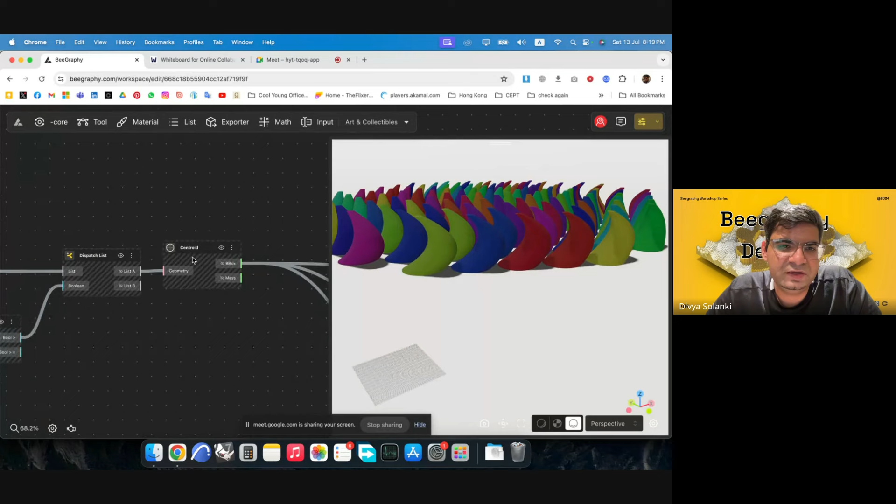So the upper part of the geometry is kind of done. We can always modify it. We can focus on the lower part, which is the base, which is the hexagon itself. If I go back to where we dispatched our list, this particular component, if I preview this on, we can see these were the hexagonal bases for each of these, and I can use that to make a surface.

So I'll use curve to surface, and I'll plug my list into this component, and you can see it has already made a surface there. Now what we have to do is extrude the surface down. So I'll use extrude, and I can go to extrude surface. I'll plug the surface in, and we can see the surface is extruded, but it is extruded up in the positive z direction. So we'll give it a negative z direction.

For that, I'll first introduce the z vector, and I'll plug that in. And then I'll give the z vector a factor. Currently it's 10. I'll just keep it with 10 only. But I'll give it an opposite or negative value. So the 10 will first go into opposite, which will make it a negative value, and then it will go into factor. So now we have the extrusion going in the other direction. So now we have the bases also ready for this geometry.

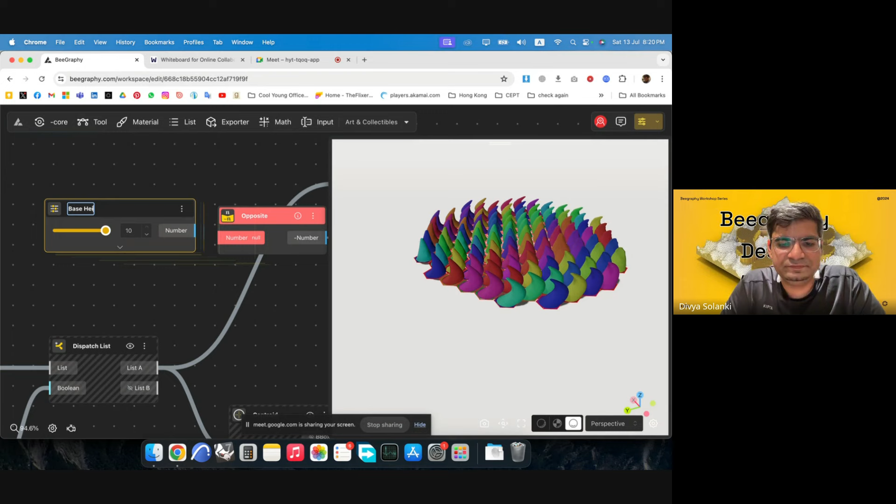Okay, so I'll make this also into a range. So I'll write 10 again. I'll put range input, and I'll change this to base height, and I'll put this in. Preview the rest of the model off. Great. So now we have the base as well as the upper geometry with us. I'll push this forward.

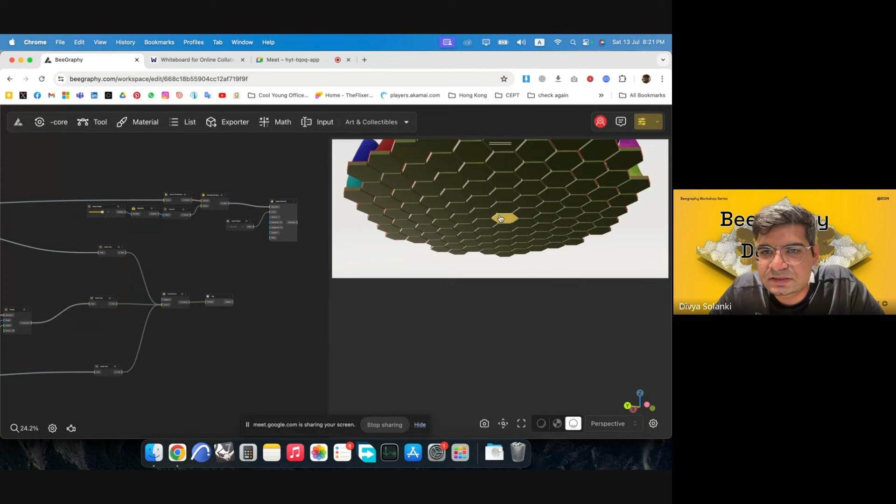Now maybe we can give it a material. So if I double click and write material here, we can apply a material. I'll put the bases here, and I can give it a color. So if I double click, write color, there is a color picker component, and I can just change the color to some other color. For previewing that, we would have to hide the previous part. So yeah, we can see it as all a single color now. It's green. Maybe I can change it to something more whiter. Yeah.

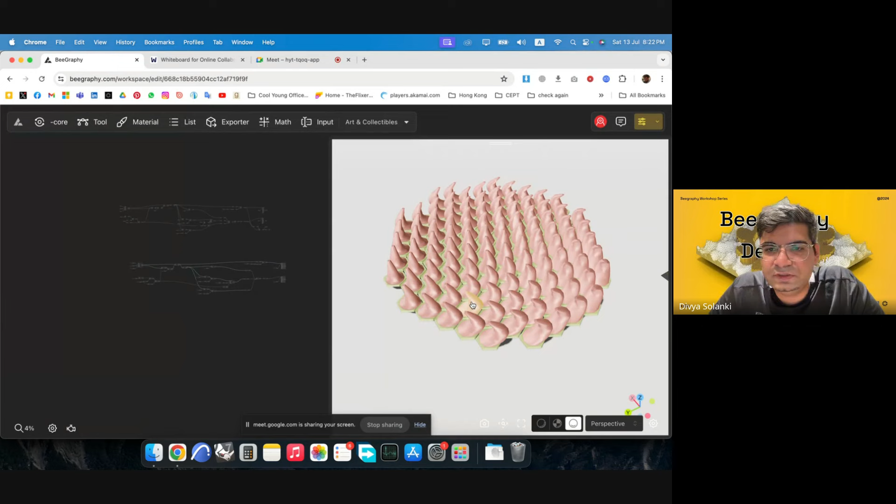Great. So now we just go and do the same thing for the other part as well. I'll drag this and copy. We'll use this for our geometry above, and I can give it a different color, maybe red. Yeah. Move these a bit forward. So if I preview off the whole of the previous part, you can see we have a geometry, it is twisting, and we can always play with the parameters that we use to configure it. So now we can probably try using the configurator mode for this.

For that, we would first have to show all the ranges we have put in the model. So I'll just switch on all the range components I have. This one, this one, this one, this one. It's a good practice to give names to each of them so that we can understand what they do when we go into the configurator mode. I think we have all the ranges. And the color picker also, I'll just preview on so that we can change color there. Great. So now we can go on to the configurator mode.

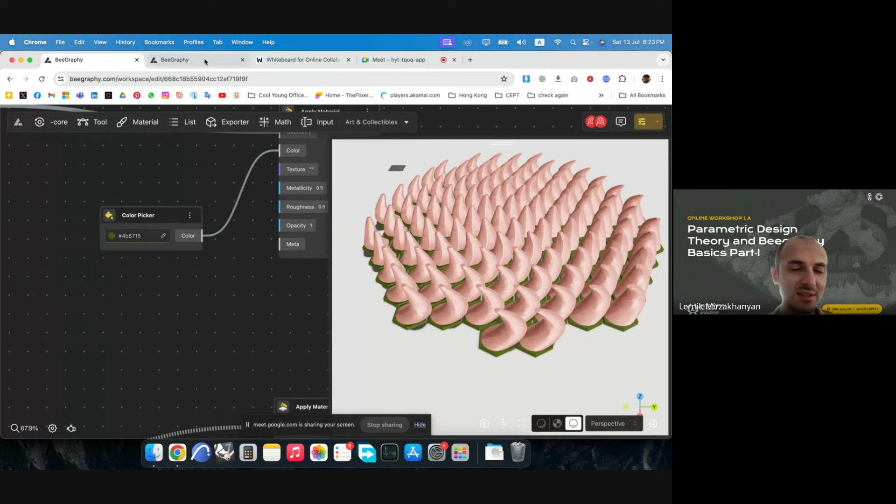It will take its time. Yeah. I think I don't have the geometry. Okay, I'll just... Can you refresh? I don't know what's wrong. Yeah. I think I'll just use, or should I change the color? No, I don't think the problem is with the color, but can you go to the demo mode instead of configurator? Just curious if the demo mode will work.

No, I think I'll just use it without the material for now. Yeah, maybe it's some material. Yes, I think the problem is with the default values of the materials for roughness, metallicity, and opacity. Yeah, it returns an error. It doesn't like if you refresh. Actually, if you refresh the script, this part? Okay, yeah, refresh it. It will probably return. Oh, I think it's still not coming, even without.

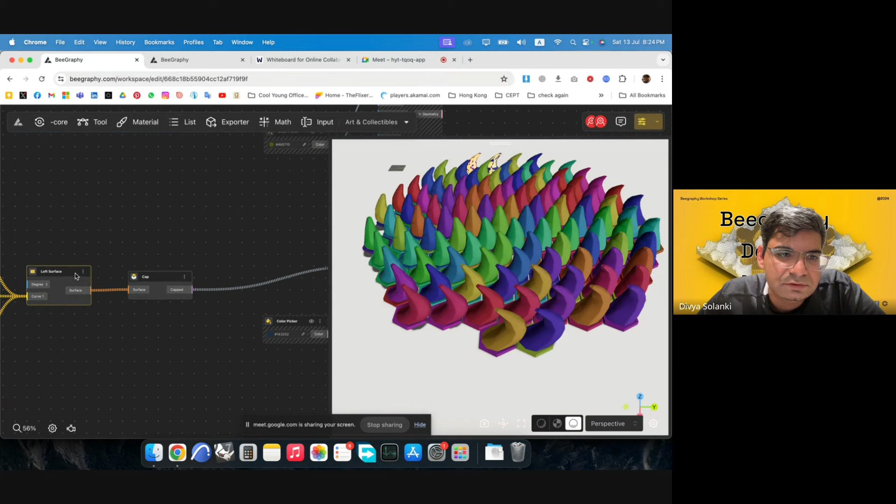It is showing here. What if I refresh this page? Okay, I'll refresh this part. Should I just do refresh or go back? Yeah, no, just refresh the tab. Okay. I'll just check, delete the... Yep. Just a second. Some wire is disconnected. Yeah, I was facing this thing before as well.

I'll just extrude surface, graft. I'll just have to put this back here. I think the loft component was having some issue. Loft surface. So the nodes suddenly disappear. Yeah, I was having this issue. Might be related to something. Graft 3, list merge. And so this is our first one. Second one. Third one. This goes into curves.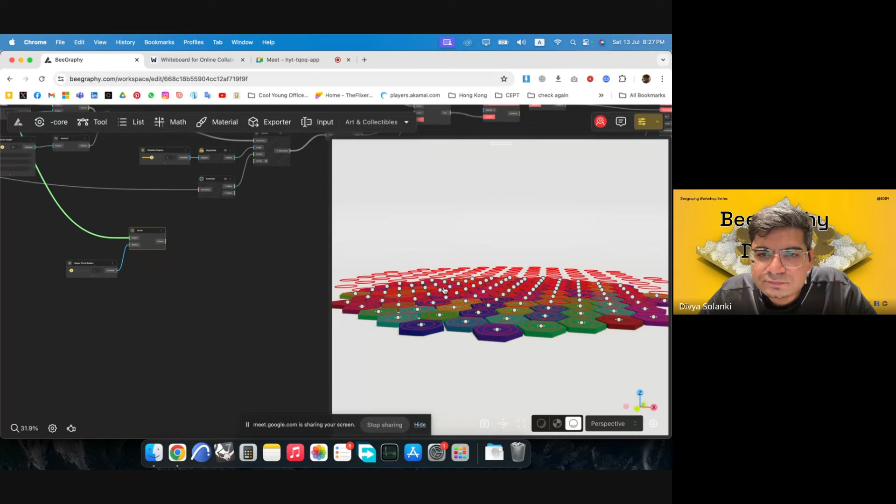Missing the lower, upper circle. Yeah, so for some reason the lower circle. Can you refresh again? What is it outputting? Yeah, attach a panel. I think I'll just replace this circle with the radius. Change this here. Oh, I think the move part is missing. Sorry, move part got missing. I'll just add this again. Change this to 100.

Yeah, I think we have the circles now. Put this into graft. Yeah, we have the geometry. Just put this into this. Yeah, let's try configure it. Yeah, now it's coming. So since we gave the ranges, we can always change the ranges. I'll change the rotation. I think I switched it off. I'll go back to this thing. I'll preview this on. I'll go back to configurator. I think I would have to restart configurator. Yeah, you could have just refreshed the tab. Oh, okay, yeah, sorry.

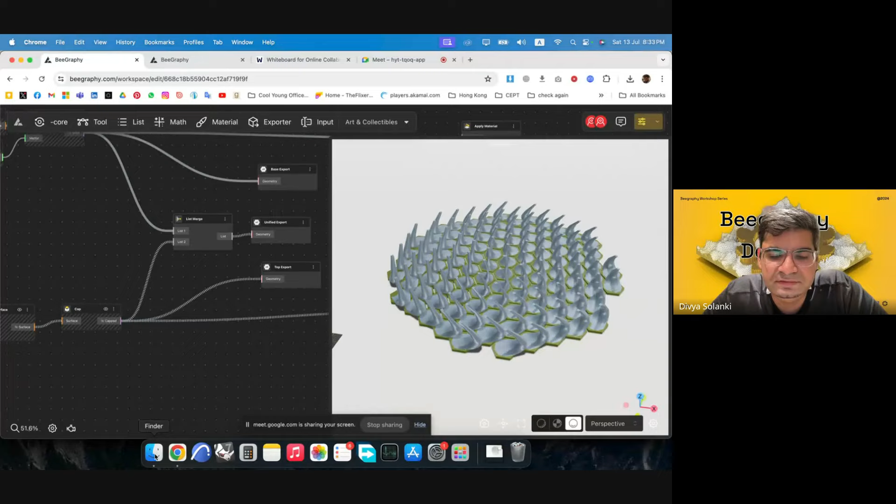Yeah, so you can see it took some time because the geometry is a bit complex, but we have the geometry. You can view it in any of the viewers. I think you can view it in Rhino as well. In Mac, for some instance, it can be viewed in Preview as well. Or you can take it directly to a 3D printing slicing software.

So you can take it directly to Cura. Cura Ultimaker. I don't think that is available for Mac, but you can directly take it to Cura, and we can directly print this right away after scaling it down on Cura and slicing it.

So, I mean, we understood how the logic is built, how we start, and then we have ways we can use collaboration, and we have ways where we can export the geometry as well once it is decided and sent to 3D printing. So any questions anyone has? I can understand it might have been a bit steep.

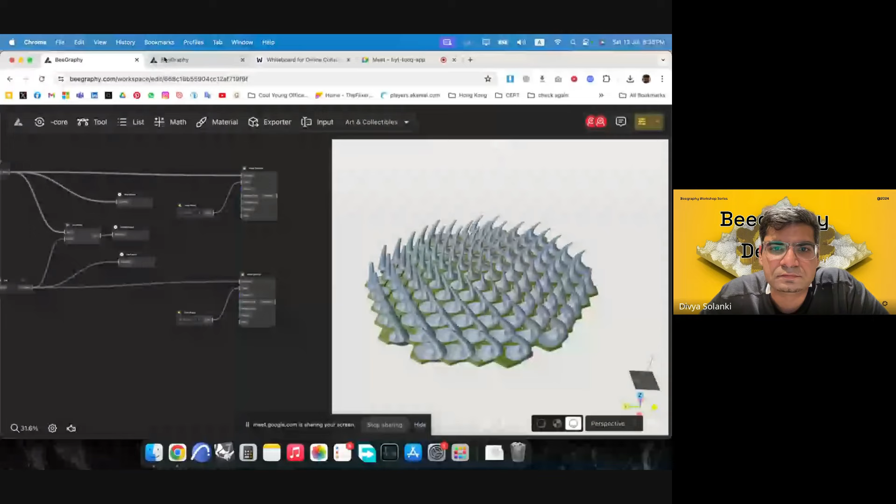Can you please explain the dispatch list part? Yeah, sure. Let me share again. Is my screen visible? Yeah.

Yes. So I'll go back to the dispatch part, which was this, and this is an amazing component to use because it gives you so much power, like to choose a particular set out of a particular set, out of a condition. So in dispatch list, the set we were giving it was the grid of hexagons, all of this, but we only wanted a part of it and not the whole thing.

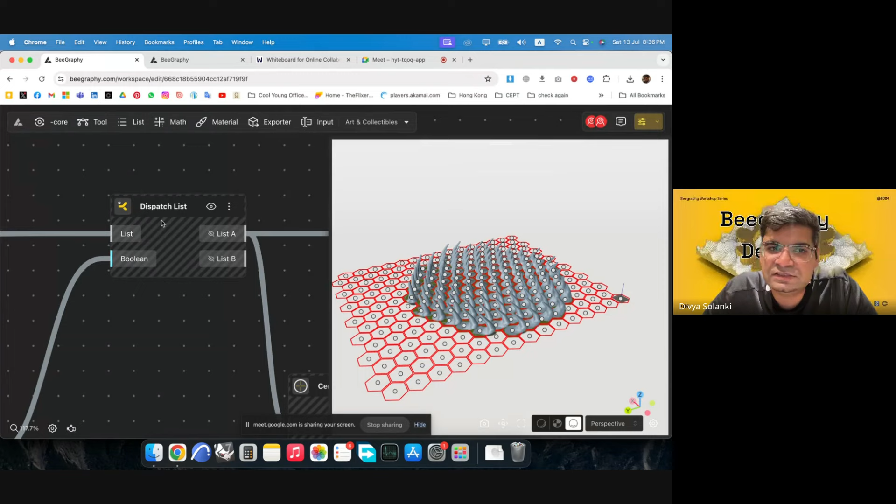So what dispatch would do, it is a very simple component. It just takes a list. So we give it all the list and we give it a true and false value. And what the true and false value actually did was it just told the dispatch component, for that particular hexagon, whether it is true or false that it is inside or outside the circle.

So how do we get that true and false? For that, we had to use the point in curve analysis component. This particular component only analyzes something for you. So what we wanted to analyze was whether the points, the centroids of the hexagons, are inside the curve or not.

So for that, it required an input of curve. The curve was our circle, and it required all the points we wanted to analyze. So we gave it the circle and we gave it the points, and the output it gave was these numbers. So if you click on the numbers, you can see it was telling us the relationship between the curve and the point.

So if the point was falling outside, it was giving an output of 0. If it was on the curve, it was giving 1, and if it was inside the curve, it was giving 2. So it is very specific in what analysis it is giving you. So once we have these numbers, the only one we are concerned with is the one which is inside the curve, which is 2. The output is always 2 for them.

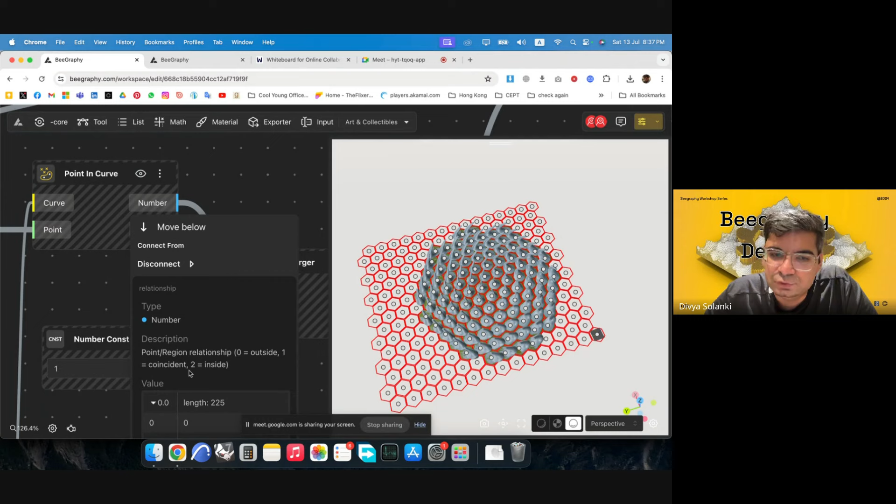So we wanted to make a true or false based on this particular thing. That if the output is 2, then it should be true that it is inside. If it is 0 or 1, it will be false. So what we did was we just used the larger than component, larger than 1, to segregate only those hexagons which had an output of 2, which means it is inside the curve, and that we put in the dispatch component. So that gave us all of those which were inside.

There were other questions as well. I think, dispatch, which function was used to select curves within. So it was point in curve.

The other one is if we can use panels on a curved surface, like a cylinder, using those hexagonal panels. Yeah, I think you can do that. We can try, but one thing is there that when we apply a paneling tool on a surface, what Beegraphy does is it has trimmed surfaces and untrimmed surfaces.

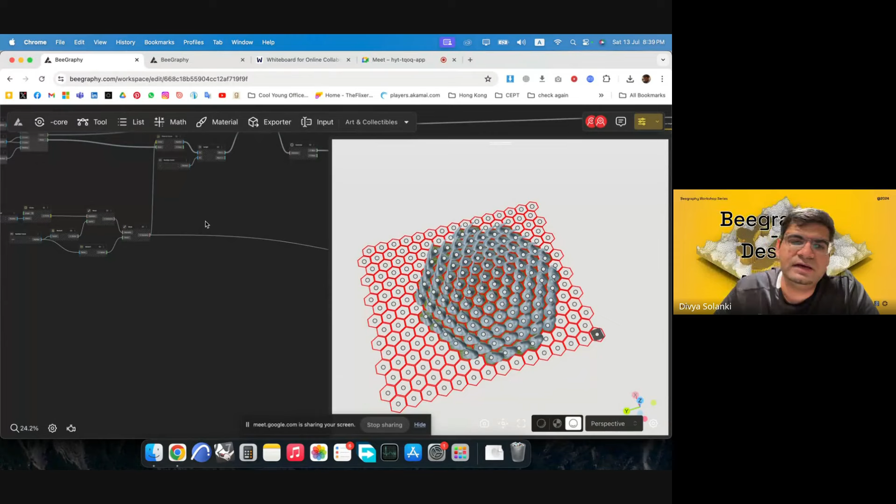So trimmed surfaces are surfaces which have a boundary, but they are part of a larger surface. So they are cropped to that boundary, but they are actually part of a larger surface. And the paneling tool will be applied to the larger surface and not the boundary itself. So for that, we would require an untrimmed surface, basically. So I think for the loft one, that could work, no?

So loft, yeah, maybe loft can work. I've not tried it here. It can work probably, yes. Yeah, for the loft. So it just has to be an untrimmed surface. So probably for each of those elements, you could apply another panel, and it might get more and more complicated. But I think that's what he's probably looking into. Yeah.

Can you repeat the rotation of the middle circles part? And from where did you extract the centroid? So the centroid was extracted... If you remember, we used the circle to isolate these particular panels. So I just use that circle to get the centroid.

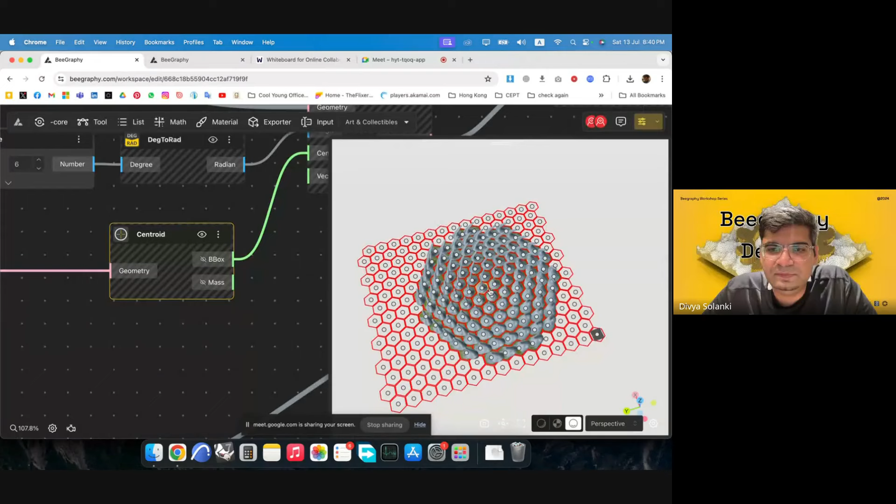So for getting a centroid, you just have to use the component called centroid, and you can give it a geometry, a curve. And then it can just give you the center point of that geometry. So it came somewhere in the middle, and I use that as my base point for rotation. At first I was trying to... okay, any more questions?

There was just one comment. I just replied. For a device with a touchpad, like on a phone or a tablet, connecting might be not intuitive, but we're thinking of a way to enable that. Like you click on a port, then you click connect, and then select the other port that you want to connect to. But it's something that we're yet to implement.

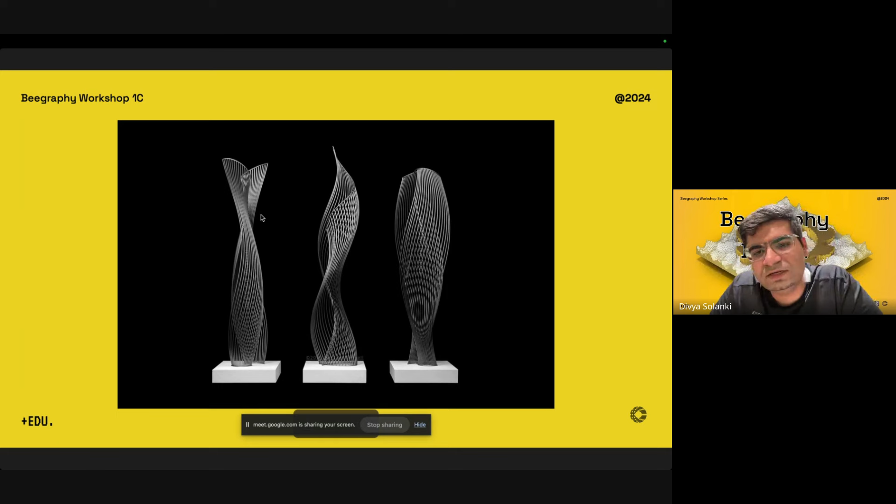And similar logics we can always use for all the other kind of art and collectible objects. So this one is again based on a repetitive thing that is rotated at this particular point. So you have a cross section here, a cross section here, a cross section here, and this part is rotated around. Same thing we can achieve with this. Yeah, these can be a bit advanced, but this is again very similar to what we were doing.

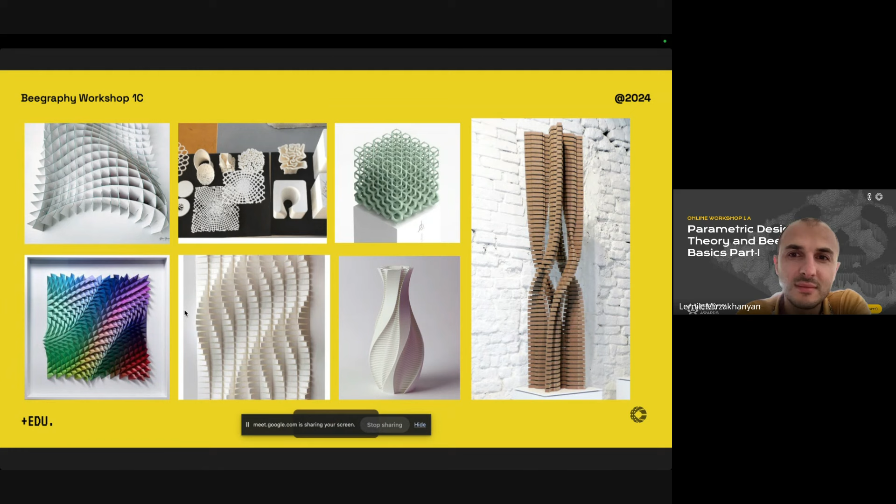And we can always use the image sampler tool for generating something like that. So each of these shapes can be broken down into logic based steps, and once we have those steps, we can clearly define how we are going to modify these forms or generate these forms. Yeah.

There's one question about the trees. If we can show probably the script and the branches, is that the question? To just see the whole script again. From... no, yes. Okay. Right, about the random colors assigned to geometries. I think there's one question, please, I think you can.

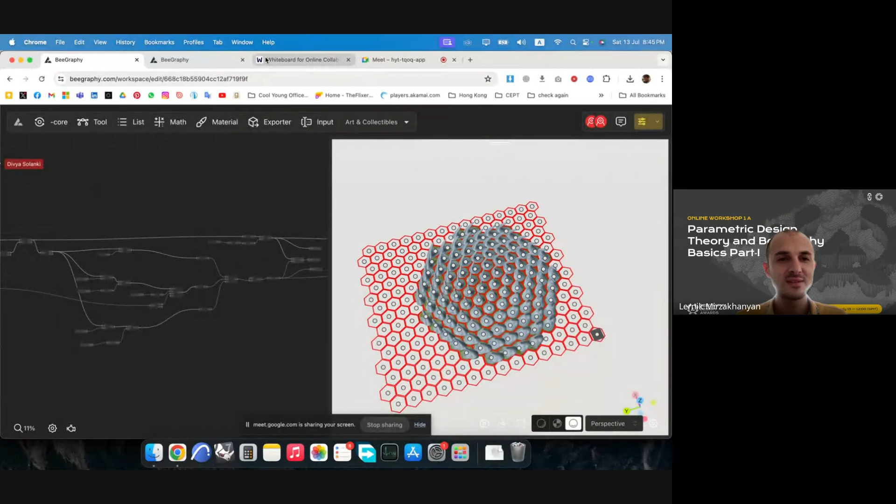Yeah, regarding the colors. So we thought it's easier to differentiate items when they have different colors. So unless the designer intentionally wants to select a specific color, he wants to know when those items are different items or same items. So if it's different items, then we decided that colored items would be more intuitive. Maybe we're wrong. Maybe you give us feedback and tell us that it wasn't a good idea.

There was one more question which is related to the loop, trees, right? For the trees, should I explain the theory of it, or should I explain the graph flattening and all of that? I think earlier Nuno asked the question. Yeah, Nuno lost a few parts. I don't know how we do this. Maybe it's connected to another question.

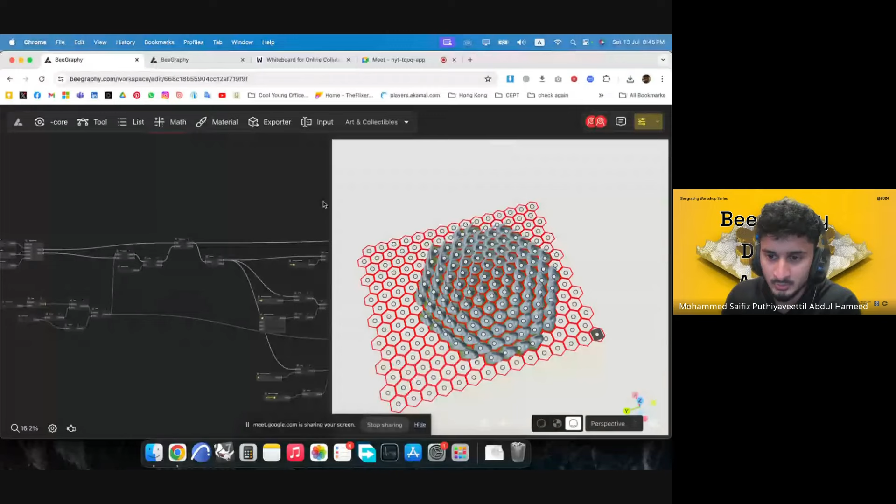Is there a way to export a high-res image of the script? What do you mean by that? Like the script as an image? Like the screen? Yeah, as an image. Oh, no, didn't expect that. Is it something that people would do in Grasshopper? That's where the question is coming from.

Yeah, I think you can. Okay, I'll put it down. Feature request, that's something that could be added. Export. Thanks a lot for that comment. Probably we can export as a PNG or JPEG.

Some question. Can you answer the last question? Because I have the same question. I think most of the softwares are based on mathematical calculus engines, calculus and physics engines. So I think they work with radians better than degrees, most of them. But I am also a bit guessing in that.